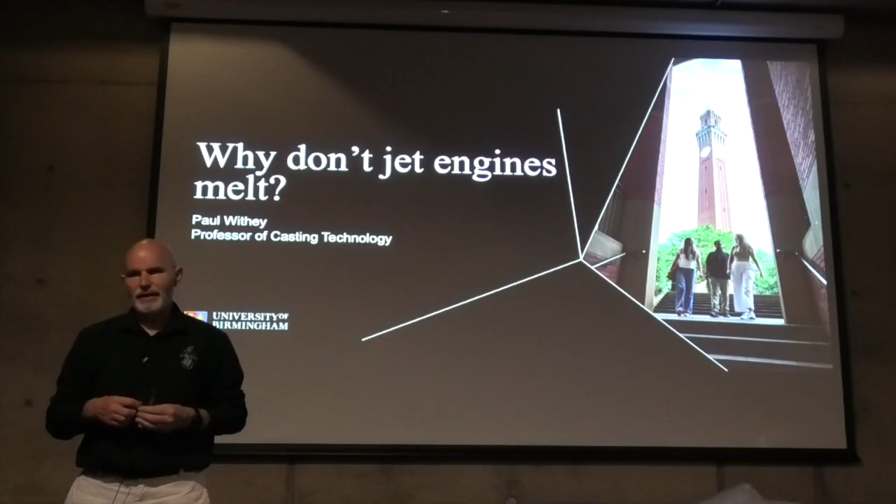So why don't jet engines melt? My career has been based, as Darren's kindly pointed out, for 3 decades around single crystal casting. Now, a lot of the talk was written around aircraft, commercial aircraft. But one thing to remember, and I'll try and touch on this as we go through, rotorcraft became viable. Leonardo da Vinci designed a theoretical rotorcraft, which was theoretical and man-powered and probably wouldn't have actually got off the drawing board, which is probably the best place to leave it. And whilst they came in with internal combustion engines, in terms of piston engines, they actually became viable with the advent of the gas turbine.

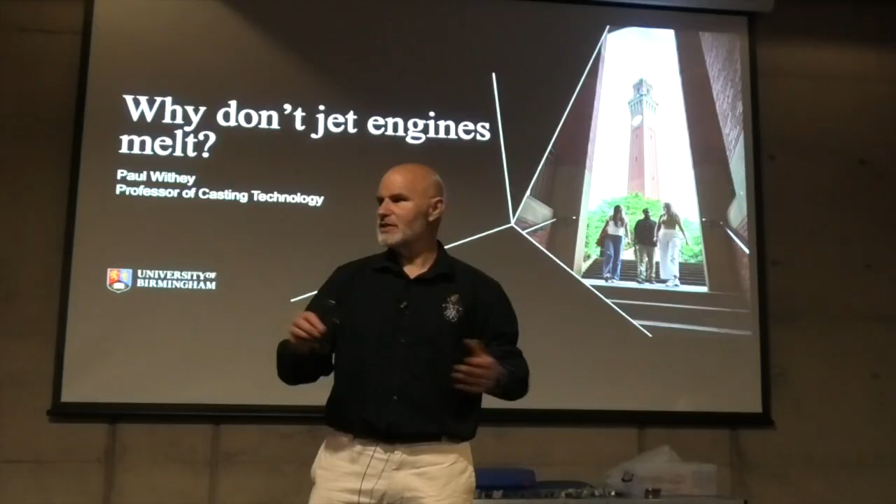The power-to-weight ratio of a gas turbine actually means that you can fly a helicopter in a way that means you can actually carry some load, which was always the way - that's a good achievement. And so everything I'm going to say today about why jet engines don't melt applies to helicopters, civil aircraft, military aircraft, anything that's gas turbine related. And to an extent, power generation, oil and gas pumping, anything that uses a gas turbine. So it's not that most of the examples are picked from civil aviation because that's all there is - it's because that's where I could nick most of the stuff from Rolls Royce. Sorry, that's on video.

But equally, it does actually give a good story to tell, especially for students who are trying to engage in STEM subjects. Now, the talk tonight is going to get a little bit technical, and I can only apologise. I'll try and keep the technical stuff as light and as high level, but if I start getting too technical, just throw something at me and we'll change the subject.

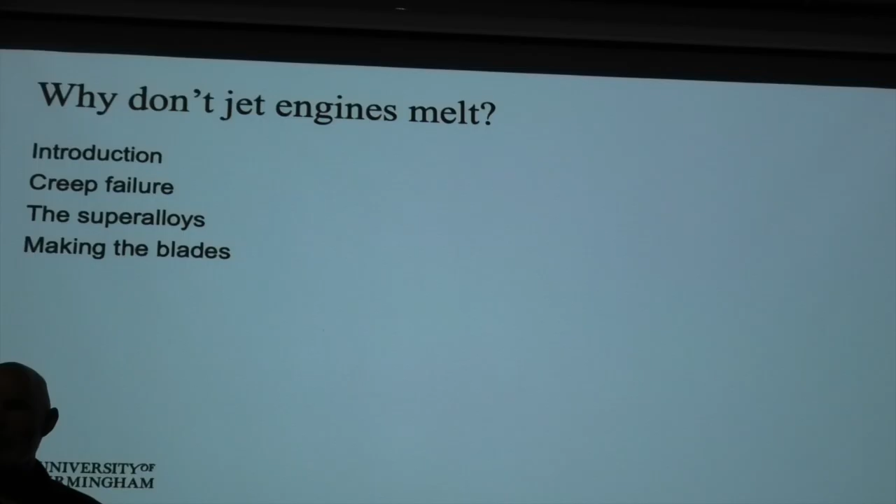So I'm going to try and cover a bit of an introduction, creep failure, the superalloys - the materials we make blades from - and making the blades, and we'll tidy it up with that. I'll be passing a few bits around, scattered there to remind me to pick them up and pass them on. Those of you playing Sudoku at the back may need to come forward a bit, otherwise your colleagues are going to be straining to pass them. I'm going to pass them to the front row, and hopefully by the end of the lecture most things will have got somewhere towards the back. But we'll see how it goes.

Aviation development - it is a long time ago. It's not that long ago that the Wright brothers made that first powered flight. So actually the development of aviation has been really, really quick, and I'm sure you're all aware of this.

It was only 1952, the world's first passenger aircraft, the Comet - that's a picture of the Comet that used to be outside. In 1959, world's first non-stop transatlantic jet service. And most people today assume popping across the Atlantic is kind of normal - I just go on the internet, buy a ticket, I'll be there tomorrow. Today's aircraft can carry over 10 times the number of passengers and up to 4 times the distance of that first jet airliner. So since 1952, we've come all that way.

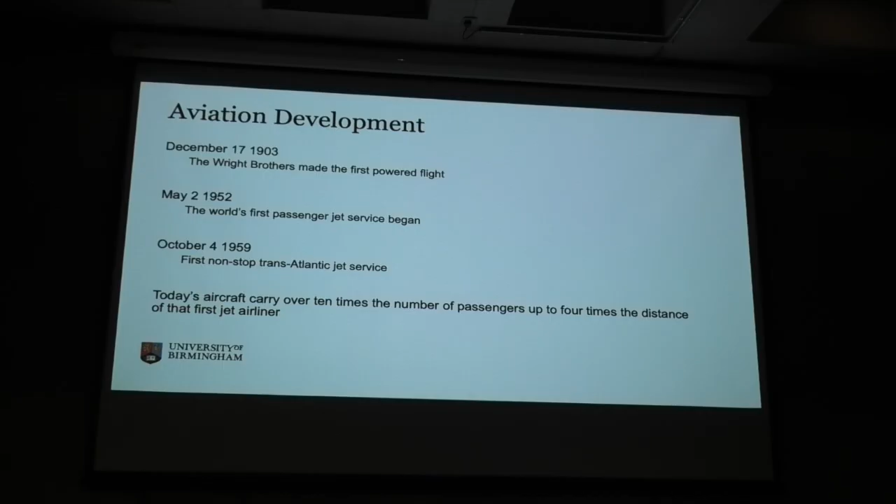But going back, the Wright vertical 4-cylinder engine was what the Wright brothers used for that first powered flight. It was designed by the Wright brothers because nobody else made even - if you think, cars weren't that much older than aircraft at this point, 1890s. So when they said we need a really good power-to-weight ratio motor, everyone said we haven't got one of those. So they had to design their own. It was handcrafted, hand-designed by their mechanic, and it's an aluminium casting. They actually got a foundry to do an aluminium casting - first use of aluminium in aero engines - to make the cylinder block. And they made the cylinder block, and it had 12 horsepower, and with the power of the propeller, about 90 pounds of thrust.

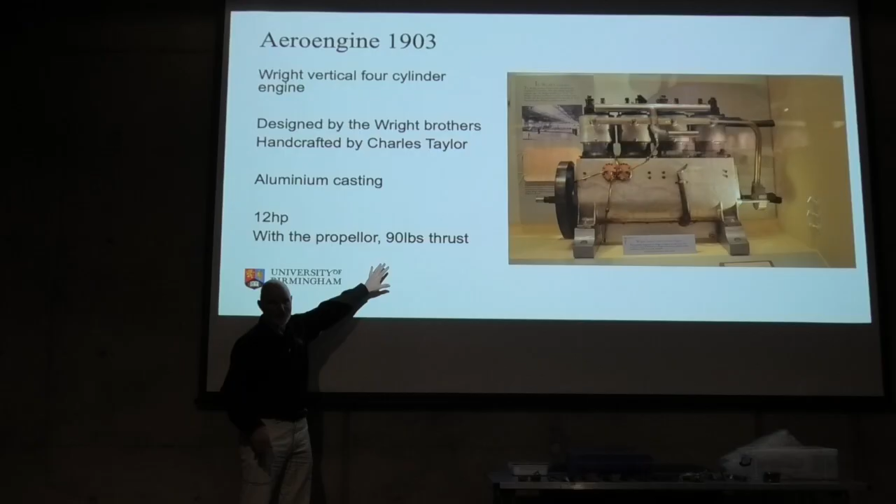We'll come back to these kind of numbers later. But 12 horsepower - if you had 3.5 of them, you could power a Reliant Robin. So I would say that they had what they needed for that first flight, but it wasn't very powerful. And what we've done since then is we've made it to the point where we can get people across the Atlantic, we can get them around the world, we can do long flights. So we've seen an incredible development since 1903.

Many areas: payload, range, reliability, safety - we don't expect to crash these days. Number of takeoffs, roughly equal number of landings. And it's been enabled by developments in many areas, but the casting of aerospace components that we'll be covering today - Professor of Casting kind of was in the clue - it's the casting of aerospace components, old processes modified for new materials. So that's where we're going to be going.

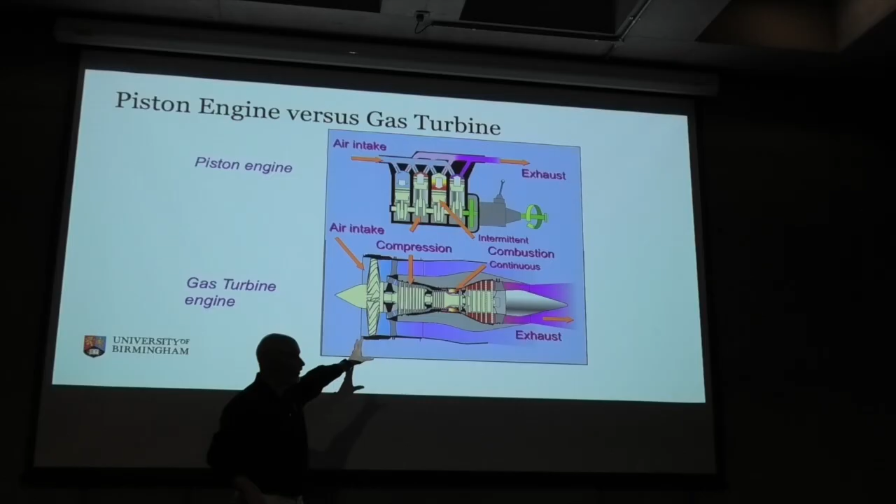But just that concept, the piston engine, that first piston engine, and the gas turbine. Why was the gas turbine? It was a steam turbine before, in the 1800s. Whittle really saw the benefit of that, Hans von Ohain the same. You get a piston engine - what you're trying to do there is generate power from burning fuel. There's no difference between the two different types. The issue is, in a piston engine, you're going to do everything in the same space. You're going to suck the fuel in with the air mixture, you're going to compress it, you're going to ignite it, get it to expand, then you're going to try and eject it and exhaust it, then you're going to go all around that cycle again.

For each of those bits of the cycle, the temperature you need is going to be slightly different. It kind of all comes out in the wash, and your internal combustion engine, your piston engine, runs at a pace that is kind of okay for what it's trying to do, everything all at once. What's more, we tend to rely on the fact that it doesn't get really, really hot when it's combusting, because it would start to need more cooling than we currently use for these types of engines.

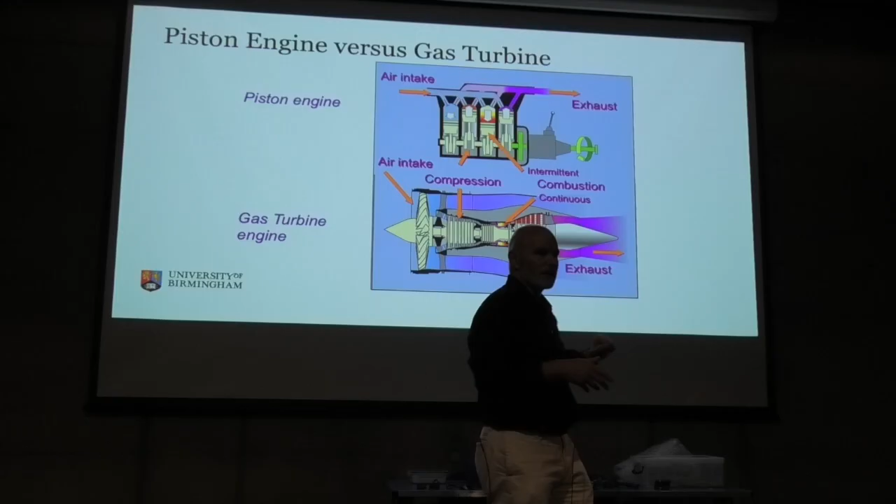The gas turbine is brilliant because instead of having the air in one place and getting it to do everything, we pass the air down the engine. It starts at the fan, gets a bit compressed, gets more through the compressor, pops out into the combustion chamber, we add fuel, we set fire to it, bit of a bang, chucks it out through the turbine, it starts to expand. We can do each of these stages in a line down the engine, and by doing it this way, each process can be optimised for what we're trying to achieve.

And because we work in aerospace, we're going to really stretch the limits of what we can do. If we can make it work really, really well, we will do, because power to weight ratio is absolutely key, and fuel efficiency is the total target. If we can do this for less fuel than we could a few years ago, we've got a winning product.

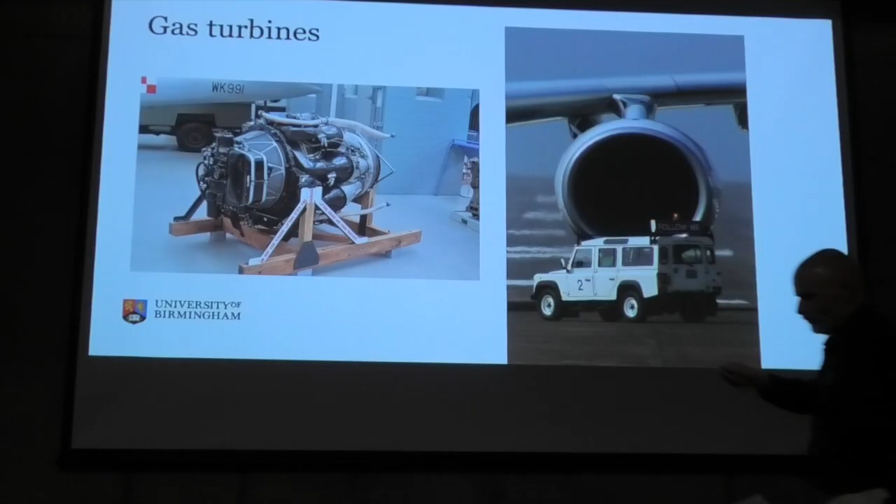Everybody's going to argue which gas turbine ran first. That's off a de Havilland Goblin engine, which actually first powered the Gloster Meteor, because the Rolls Royce engine was late - so it was frame number 5 that flew first with different engines. But it's not much different if you look at the Whittle engines - they all look the same, forged nimonic steel.

But look at what we've got today - massive things hanging under the wings, large fan. The early ones didn't have the fan. The technology has moved on so much to do what we're trying to do with that technology.

And what's that left for thrust? If you look at the early thrust engines - I talked about 90 pounds of thrust for the early Whittle, the Wright brothers engine - that wouldn't even just about make it off the axis today. So you see that kind of 1,000 pounds of thrust, using the old nomenclature, but it goes up like that. Now I stopped plotting this chart a couple of decades ago because it doesn't go up anymore - it kind of flat lines.

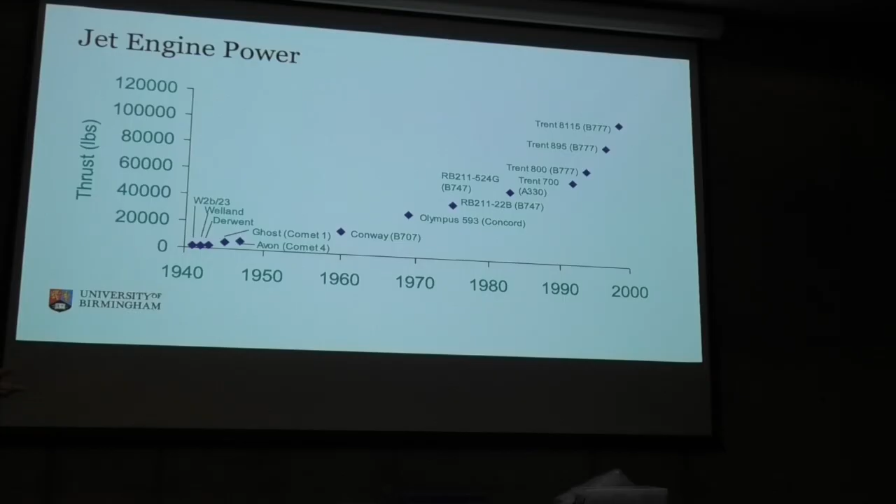What's happened is that as we've developed the technology to make these more efficient, we haven't needed bigger and bigger planes. We've maxed out with the plane size, and we've dropped it down from 4 engines to 2. So it's at the point now where you take one of those - the Trent 8115, Trent XWB 97K, those kind of engines floating around today - 2 of those would power the early jumbos. So you could strip off 4 engines, put 2 on, and that's more fuel efficient, which is roughly what we've done in terms of airframe design, which is why things like the jumbo jets and the Airbus A380s are dropping out of service - they've got 4 engines, they're less efficient.

We've closed the gap - the reliability of the engine has allowed us to close the gaps over the oceans that we used to have with 2 engines, because you're not allowed to fly a long distance on 1 engine. You had to prove you could get to your destination or your alternate if you had an engine failure. 4-engined aircraft, no real problem - fly on 3, you'd fly around the world on 3 if you had enough fuel. 2-engine aircraft lose an engine, you've got to make sure you've got the reliability left in 1 engine to get to your alternate airport or your prime. As we've made the engines more efficient, the amount of time we're allowed to fly on 1 engine has gone out - from 1 hour to 1.5 to 2 to 3, and it's gone out further.

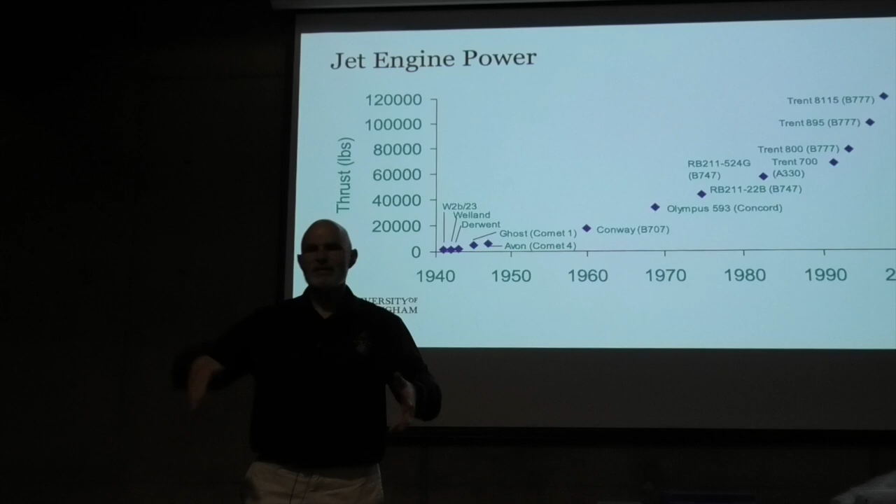So we're now allowed to fly long distance, which means that the holes that were over the oceans, which could only be closed by a 4-engined aircraft, have completely gone now. That's why the world is dominated by 2-engined aircraft. Also, not many people. You could re-engineer an Airbus A380 for 1,000 people if you so desired. Whether you'd want to be on a plane flying long distance with 999 other people in an aluminium can, I think it's a debate for the travelling public, but it's doable.

That's the kind of power we need because we're trying to lift everything off the ground. So what's happening inside the gas turbine while we're doing that? Well, we're actually compressing the gas, as I said, but we're going to compress the gas to about 60 atmospheres to really squeeze it down, so that when we add the fuel, it's got a lot of energy and it's going to just go out the back, it's going to expand really well. So that pressure chart at the top, you can see it goes to 60 atmospheres through the compressor stages, it goes into the combustion chamber, we add the fuel, it expands, and we blow it through the turbine.

Now, in old engines, we didn't have the big fan on the front. We used the fact that there was gas coming out at high speed out of the back, that gave us thrust. Today, 10% of the thrust is coming from that jet. The other 90% is the fact that we put a whacking great fan on the front, and we're actually generating most of the thrust from what is a 3-4 metre diameter propeller set, ducted propeller, and that's what we're doing.

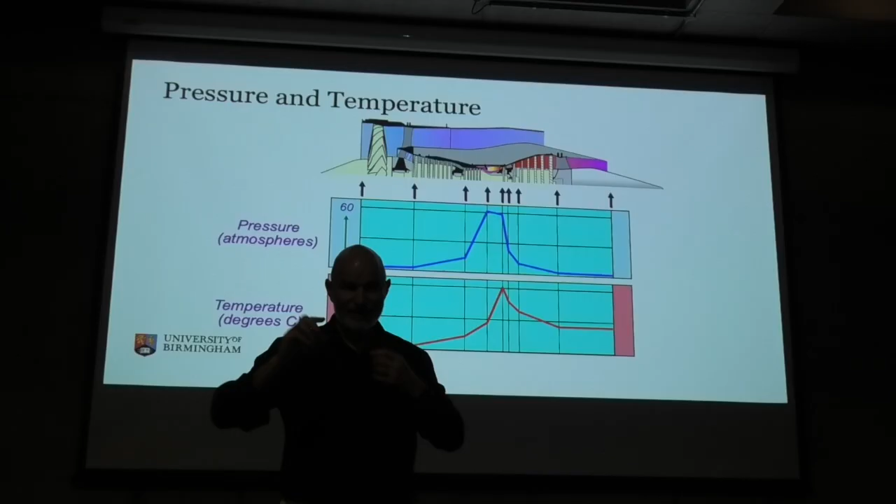But you can take that core, you can take the fan off the front, you can stick it through a gearbox and pop it up to a rotor set. Works exactly the same on a helicopter. Makes no difference to the technology on the inside. And in fact, it does make no difference. We, at Rolls Royce, make bits for helicopters, military aircraft, civil aircraft, power generation in the same production plant, in the same equipment. Makes no difference to us. It's a component. Helicopter blades, civil blades.

Yeah, so helicopter blades aren't that big, but because you do not need 100,000 pounds of thrust to lift a helicopter, you certainly don't need that big on the back of your helicopter. So we're going to squeeze it down. What that also means is that when we add the fuel and stick it out the back, the temperature goes up. Now, the compressor, adiabatic kind of compression, means that you're going to squeeze it down to a 60th of its previous size, so 60 atmospheres. That puts it up to about 650 degrees C.

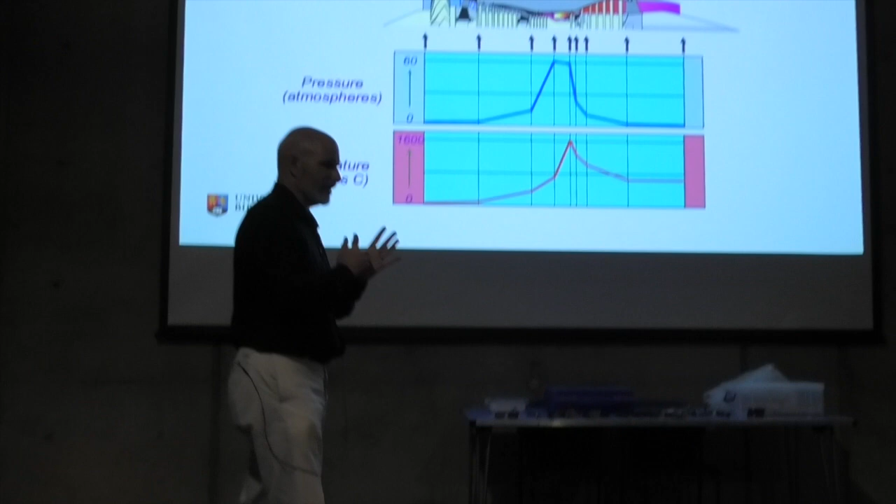Just purely compressing the gas, chemistry tells you that goes to about 650 degrees. So when it goes into the combustion chamber, it's a bit warm. Then we set fire to it, then it comes out the back. Now in a gas turbine, the efficiency of the gas turbine is entirely determined by what happens next. And the components that sit directly behind the combustion chamber determine the efficiency of the engine, the engine cycle itself.

The fan on the front determines the overall thrust and to an extent the noise, but all of the things like emissions, efficiency, everything else comes out of the turbine section, and primarily the high pressure turbine blade, which is the first rotating component behind the combustion chamber. And that's because that gets hit with the highest temperatures, so it has to be able to survive as best it can in a really, really aggressive environment.

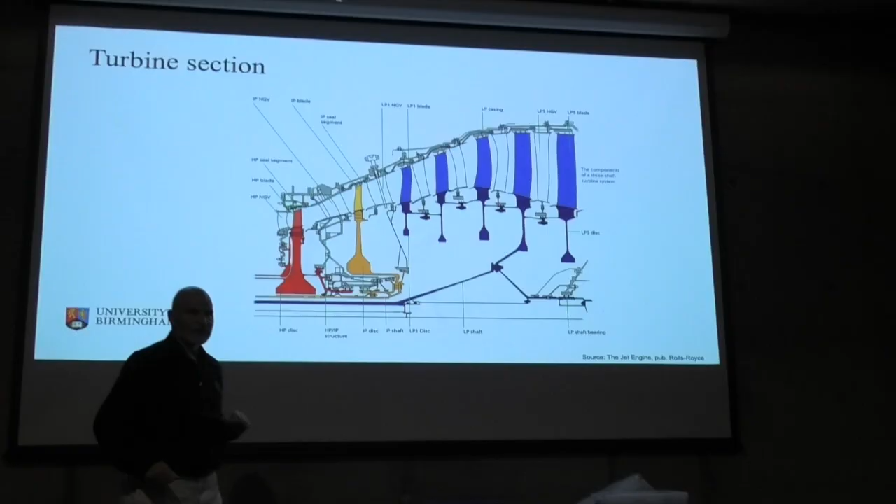So the temperature peaks out, and then as we expand the gas through the back end of the turbine, the turbine is just designed to take power out of that gas stream to power the compressor at the front. So all we're doing is taking power out of the back, whipping it up to the front to make it all turn, to suck more air in to make it go again. And the fact that we've put fuel in means we've got an energy balance which generates thrust at the same time. So we get the energy of the fuel, the chemical energy is turned to motion, thermal energy, and then onto mechanical energy. So, behind the combustion chamber, we've got in red the high pressure turbine blade. And that's the bit that determines your engine cycle.

That red component is followed by the yellow one, which is another turbine blade in a Rolls Royce engine, the intermediate pressure turbine blade. That powers a different compressor set. And then the low pressure is in blue.

Now it gets cool. So we're starting here at the hottest point. By the time we're down at this back end, we're probably exiting the gas turbine at about 700 degrees C. So that's the kind of temperature drop as we go through the engine.

So those are the components that are absolutely crucial. That one in red is the one I'm going to focus on today, because that's the one that drives everything.

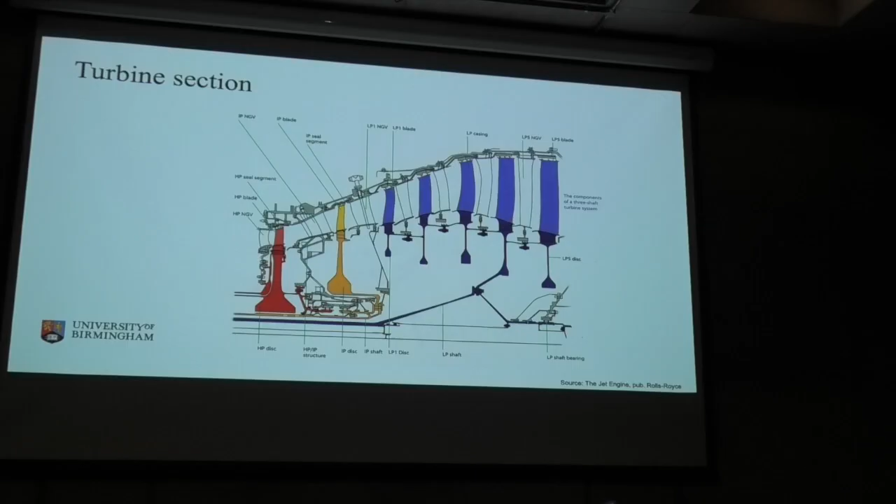And what we've done over the years, we've just driven that temperature up. We would like it to get to about 2,200 degrees C, maybe a bit more, and then burn the fuel as hot as we can to make it as efficient as we can as a kind of thermal engine.

2,200 degrees C will melt most things. There aren't many things around that you'd want to make a turbine out of that will survive that. So currently we're up at about just over 1,600 degrees C.

Now 1,600 degrees C is a bit of a challenge because a lot of that temperature is going to have to be either absorbed or removed from the system, or we're going to have to deal with a lot of heat. We're going to try and make sure that that engine doesn't melt. And 1,600, 1,608, 1,610, which is roughly where we are, is probably going to take a lot of technology to keep us there. I'll run through some of the numbers.

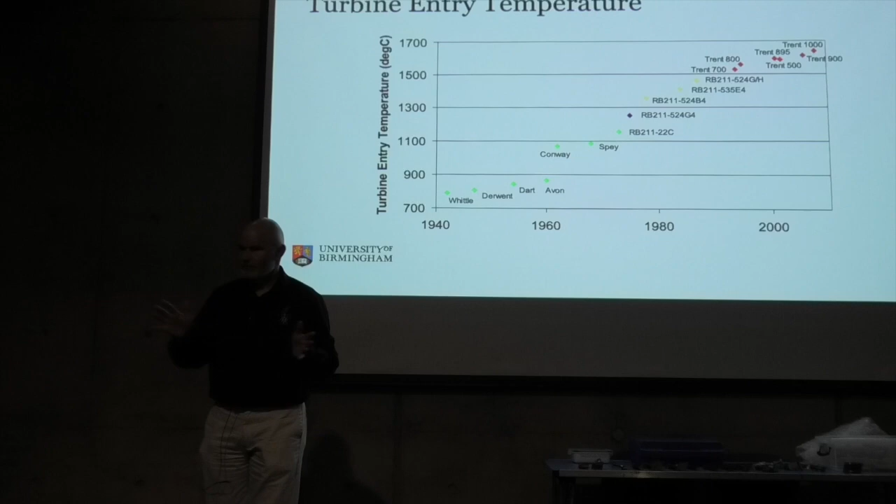The blade that's been passed around, the Whittle one, that took about 800 degrees C. Straight steel derivative, it got a bit warm, but it was fine. But also, we didn't expect it to last more than about 100 hours before we stripped the engine down and swapped it out. So we didn't ask it to do a lot of flying.

Because when you talk about the Trent turbine blade, and this is going to be the same, it doesn't really matter if it's Trent or any of the other manufacturers, you're going to do this to it. It's going to withstand a gas stream of 1,600 degrees C. That's more than 300 degrees C above the melting point of the metal. It's about 600, 550, 500 degrees C above the point that the metal goes a bit soft. So you've got a massive temperature gap between the point where you want to operate.

So next time you fly, don't sit there and think, oh, the blades are seeing 500 degrees C above where they should be. You'll rattle the poor person sitting next to you thinking they're not going to make it to wherever you're flying. And by the way, people keep asking me if I mind flying. I don't mind flying. I know what goes into some of this stuff, so I don't mind it, but you don't want to think about it too much.

We're going to rotate these blades at 13,000 RPM because we need to spin them in the gas stream. That's the equivalent of taking one of these blades - there you go, one of these blades - and if we grabbed it by the root and hung a lorry or a bus off it, it would be about the same weight. Now there's 60 odd of these in a set.

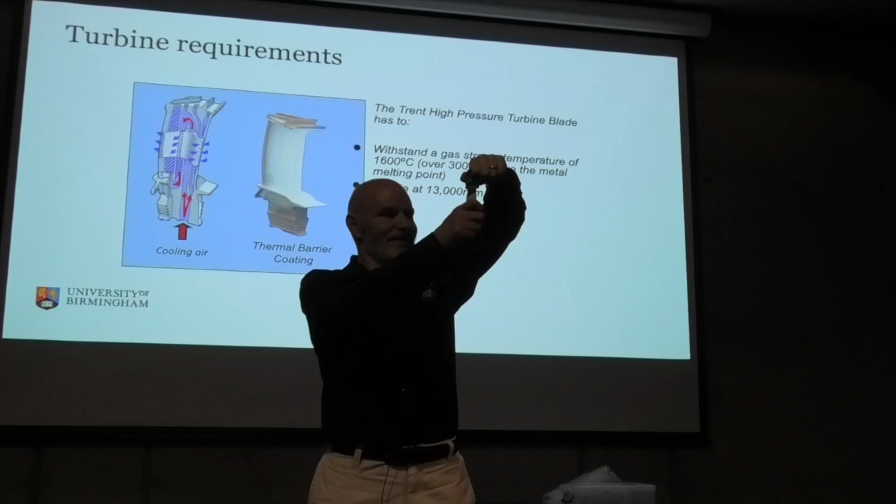And what we're going to say is we're going to hang it by that. And every blade has got a bus hanging off it statically. We're going to spin it that fast that this root block has got to take those kind of loads. It's about 18 to 20 tonnes. It'll keep us quiet for a bit.

Hang on, tell you what I'll do. Oh, yes, I will. I'll start at this side, you can pass them back in bits. Right, so, that's a few thousand pounds worth of spares.

So anyway, rotating at 13,000, so we're putting a huge load on these. We're not expecting them just to kind of spin naturally. The heat transfer rate, to keep it down at 1050, 1100 degrees C, the heat transfer rate that we're going to have to take out of that system, for just one blade, is about the same as taking all of the radiators in a 3-bed semi and cramming them into something the size that I'm just passing around.

So it's that kind of heat transfer rate that you're expecting it to happen. So we're having to dump the heat somewhere, but we also expect it to power the compressor, the high pressure compressor, and pull more gas in and compress it. 900 horsepower, each of those blades, 60 odd in a set, more than 60 in a set, each one has to generate more than 900 horsepower.

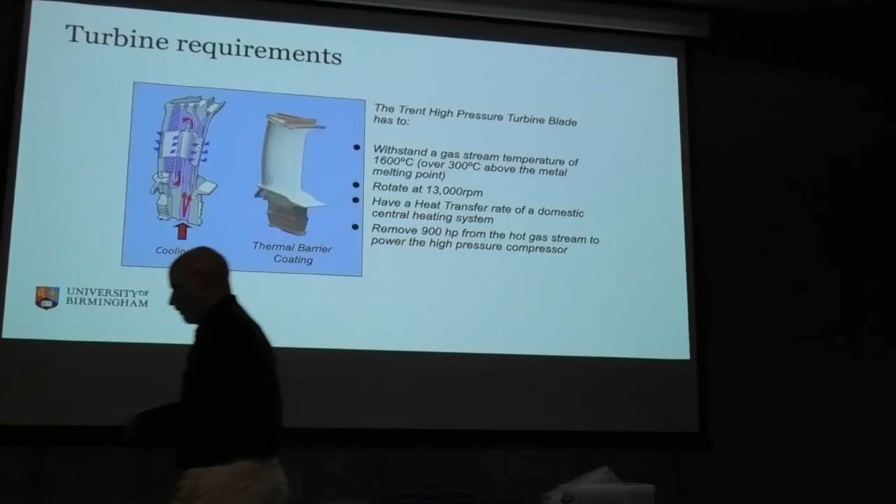So when we spin up one of these engines for takeoff, it's the same power as 3 Grand Prix at once, in terms of an internal combustion engine, just enjoying the sport of it. So it's a lot of power in a gas turbine. 900 horsepower is about the same as a Formula 1 car, and actually they've kept pace—Formula 1 car versus turbine blade power has kept pace over the last couple of decades.

We use cooling air. You'll see there's holes in it. We blow cooling air in and pass it around the blade to allow us to deal with that heat. You can see the shapes of the cooling passage, and we're going to blow it in. Now, the problem is that if you're going to blow air in, it's got to go out through the film cooling holes. We can't have hot gas coming back in through the holes, we've got to blow out. The only place we can find high pressure air that's higher than the gas stream it's sitting in is from the back of the high pressure compressor.

So as I said earlier, it's about 650 degrees C by the time it gets there. We bleed some of this off, pass it through the turbine blade. So...

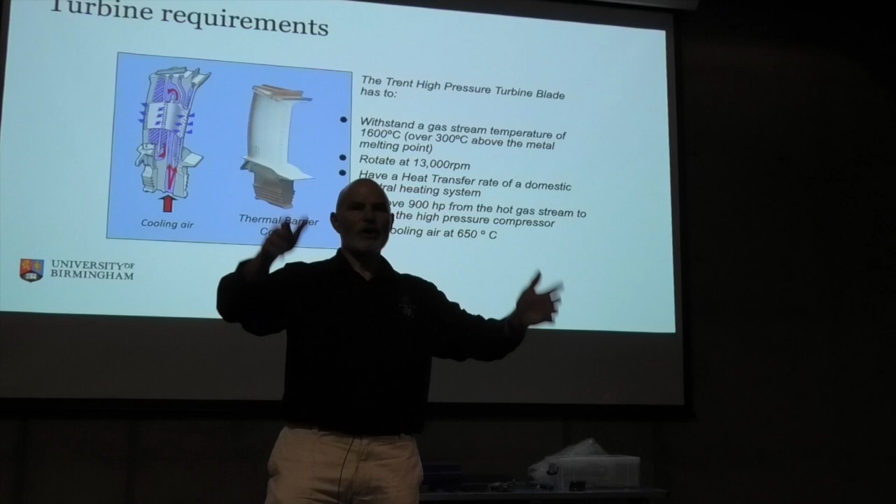I've had a career of this. You walk into the design teams and they say, oh yes, we've got cooling air. Yeah, cooling air. What temperature is your cooling air? It's 650 degrees C. Don't use it in your fridge. You know, the concept of cooling—just because we're operating at 1600 degrees C, 650 is cooling. But it's not, you have to get your mind around the fact that it'll still melt stuff.

So we've got this cooling air, 650 degrees C, we're passing it through to try and keep ourselves at about 1050 degrees C in a gas stream of 1600.

So that's the thermodynamics, that's fine, but then we've got customers. And the fare-paying public really appreciate the high tech that we put into these engines and the costs involved in making it, so they look for the cheapest flight they can. So the airlines want the cheapest option that they can get. Or, put it another way...

Can you do 10 million flying miles between services? 10 million flying miles is quite a distance. An aircraft, once it's launched, we won't expect to see it for another few years, 5, 6 years, before it comes in for its first service. Oh, and by the way, just like everybody looks after their car and polishes it, airlines...

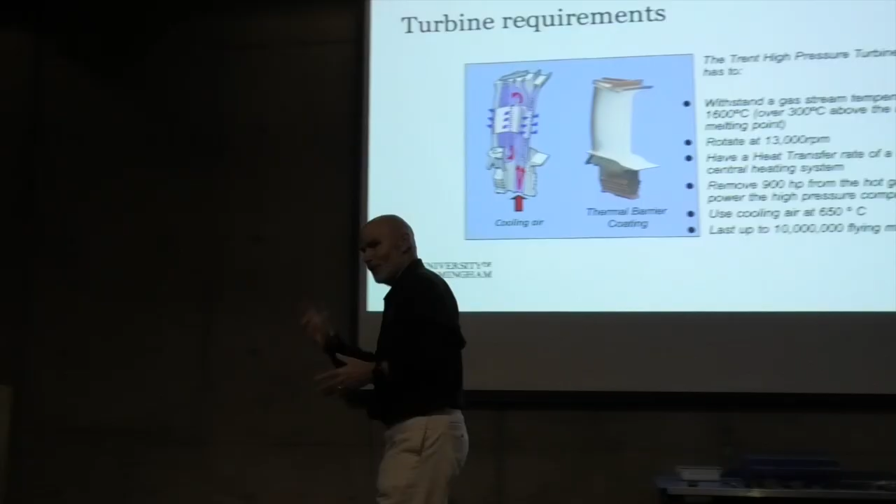They leave the aircraft outside on the stand, they let it get rained on, it gets hit by lightning once a year, it gets covered in all sorts of nasty chemicals when they're de-icing it. They really don't look after these things. And by the way, it ingests all sorts of stuff down the runway. So we are not looking after these things, but we need 10 million flying miles, guys. So we've got to make it robust and high-tech.

Customers—it'd be a lot easier if we just focused on the technology. So what we've got, that jump, you see, 1960s-ish, the Conway engine came in, we started using cooling air. Actually, the Germans, in 1943, used cooling air in the Junkers Jumo 004. They couldn't get the alloying elements for the steel, so they used cooling air. They used forged tube, blew cooling air through it, and the engine worked a treat. But because they didn't win the war, and the engine got canned, we went back to using forged steel-type blades.

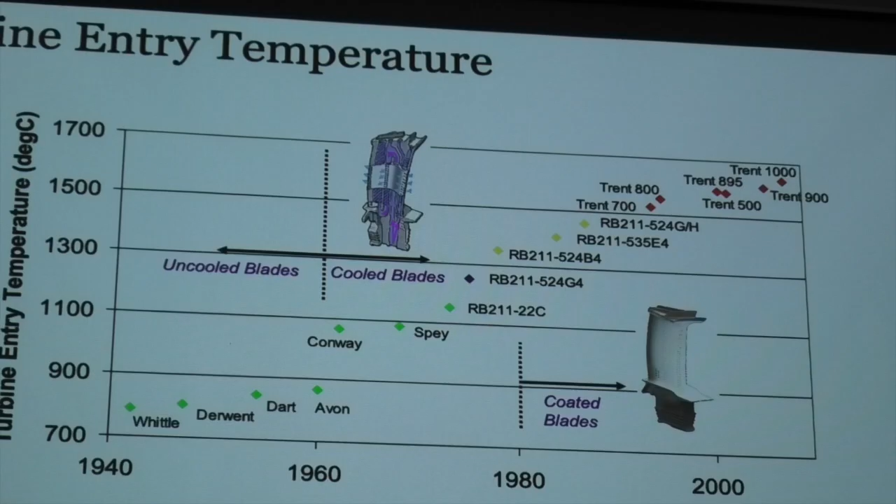And didn't actually start using cooling air again until the 1960s. But then we brought it back in again, the Conway, and so we started using cooling air, and we saw that jump in temperature. Then we started coating the blades, and you see the white coating on that blade, that's ceramic coating—I'll touch on that right at the end. That ceramic coating is like a tea cosy, and it just gives another 200 degrees. And that's why we've jumped up again. I'll come back to the couple of spots in a minute.

Right, creep failure. I'm now going to go into what the problem is. We're going to take these blades and hang 27 tons off them at temperatures up to 1600 degrees C, though it's probably more like 1,050 degrees C in practice. That's still quite warm for an alloy that melts at 1600 degrees C. We're going to hang these blades at those temperatures for a long time, and because of that we start to see something called creep failure.

Some of you will probably know it, some of you won't, so I'll run through it. Creep is the deformation of a material under constant load over a prolonged period of time. Some materials creep at room temperature, others require a bit of a temperature boost to do it.

Lead creeps, which is one reason why cathedrals change their roofs every couple of centuries - the lead roofing starts to move its way down and fattens up at the bottom. So we start to see creep failures in that. You see creep failures in all sorts of materials at different temperatures.

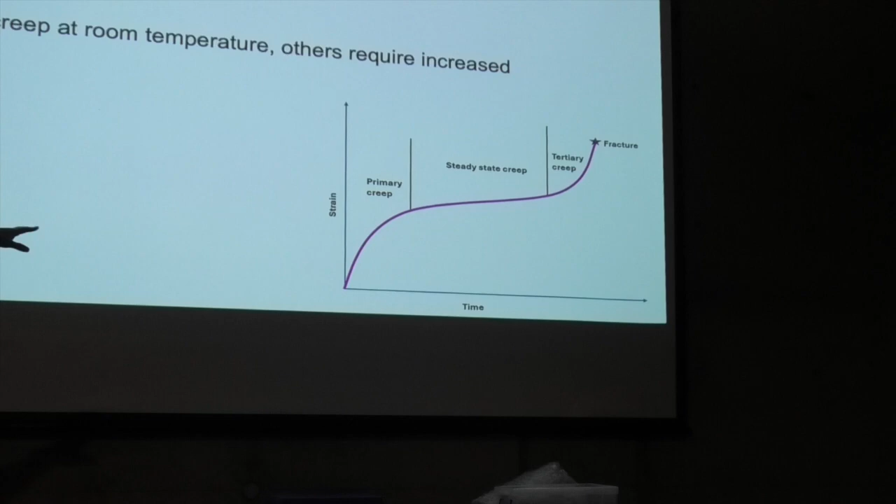That's a standard engineering graph that shows it takes a while to get going, then it's steady state creep, and we try to make sure it's steady state creep for a long time.

Then you get your final failure. Now, creep in metals happens for a number of different reasons. Diffusion creep: you get little imperfections in the crystal, you hang it up, and because of the stress direction, these imperfections can move around. It requires high temperatures, but they move around and hit the grain boundaries, and then the grain boundaries go over.

Grain boundary sliding is where the grains - if you look at a standard metal and polish it back, it looks like a sugar cube, with lots of different grains in different orientations. If you take a sugar cube and try to break it, you're not breaking the individual grains much, you're actually breaking the boundaries between the grains, because that's the weak spot.

Those grain boundaries slide in metals, and it's that sliding that means you get creep, so we get elongation with time. When we start off with a blade this long, it grows with that stress in that direction, and the longer we leave it, the more it grows, until the point where we say you can only have so much growth, and then we scrap it.

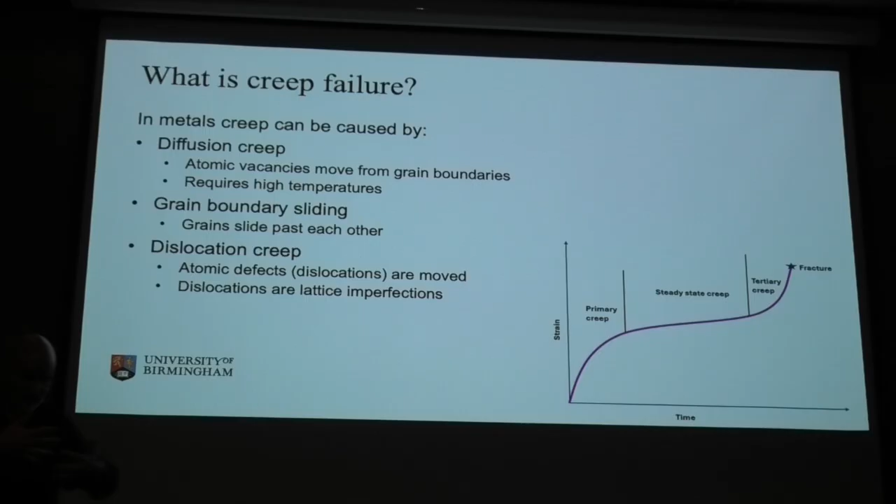Dislocation creep involves atomic defects - dislocations in the crystal, imperfections in planes of crystal atoms. You can see these on some high-power microscopes, and they move with time. Lots of atoms moving around is why we're trying to stop this happening. It's all creep, but really on the atomic scale.

So what we can do to stop it - this is the metallurgist's go-to list of things to do. We can avoid plastic deformation by cold working. Many of you have taken a piece of copper pipe, bent it one way, then found you can't bend it back again. What happens is a lot of these dislocations move, they tangle up, and toughen the material, making it harder.

That also means it's much tougher to creep. If you put in loads of dislocations, you tangle them up, they don't move very well, and they all stop moving - that slows creep down. That's one way of stopping creep. Another is refining the grain size: larger grains mean less creep, with fewer grain boundaries.

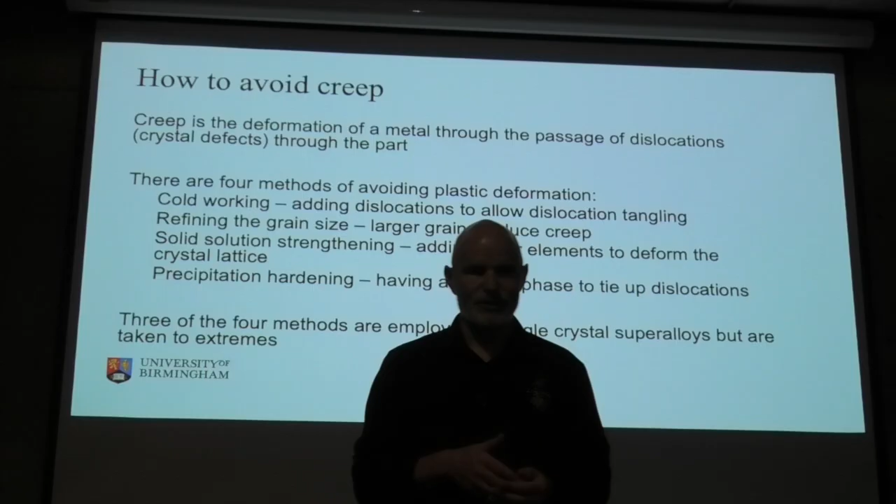Fairly simple. Solid solution strengthening is a favourite one - adding another element to deform the crystal lattice. You find an element that you can stuff into your alloy that won't come out as a precipitate, but goes into solution and deforms the crystal, so dislocations - these atomic imperfections - meet it and get stuck. And there's precipitation hardening, where we try to get different phases to pop out when we heat treat the metal at the right size, to tie up these dislocations as they move around.

That's the kind of metallurgist handbook for creep. There's a number of textbooks written about that, and that's the way we stop creep.

Now we employ 3 of the 4 methods, I'll come back to that in a minute. If we're going to look at that, what alloys would you pick for these kind of temperatures? Nickel chrome solid solution alloys have inadequate strength. So some of the historic alloys people have picked haven't got the right strength, they just wouldn't be strong enough for gas turbine use. Good for creep, but not at these kind of loads. So blocking of dislocations and grain movements is required.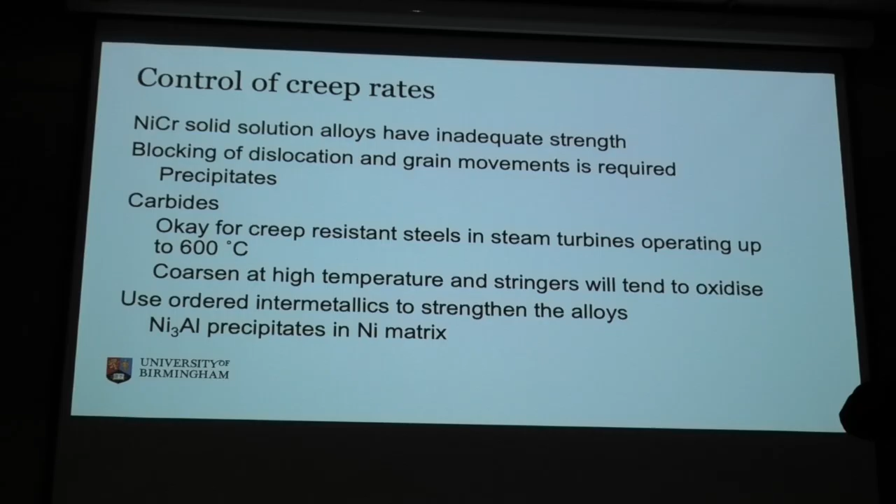So we could use carbides, we've used those for centuries. It's why in steels, you put a bit of carbon in there, you get carbides, and you get steel much stronger than iron. We learnt that through the Industrial Revolution. Really, really good. Unfortunately, you go over about 600 degrees C and those carbides start to coarsen, at which point you lose strength. So we're kind of limited, we're a few hundred degrees C above where that actually works for us. So we actually use a nickel aluminium alloy and we get little precipitates that we can control at the right temperature.

I'll show you some pictures of something in it. But just to go on to that, the superalloys, these are the blade materials. These materials that I'm going to pass around are made out of what are called superalloys. I don't know who gave them the name, they don't go around wearing capes. Anyway, they're called superalloys because they retain their strength to about 80% of their melting point.

And actually it's crucial that they do, we're going to really squeeze the last little bit of juice out of these materials. The fact that they can go to about 80% of their melting point and still be a useful material, somebody went and coined the phrase superalloys. It may have been Chesterton in the States, I'm not sure. Whoever it did, they'd been reading too many Marvel comics.

So there are 3 kind of classes of them: nickel-based, nickel-iron based, and cobalt-based. We tend to be focused only on the nickel-based. Nickel-iron base haven't quite got the strength. Nickel-cobalt, a bit too heavy, equally strength-wise. But then we're going to stick in other things as well, it's not just nickel. I think I've spent too long being a metallurgist, we will throw the kitchen sink at these things if we think it will work. It's not that we're going to add 1 element, why add 1 when you can find 10 in the periodic table?

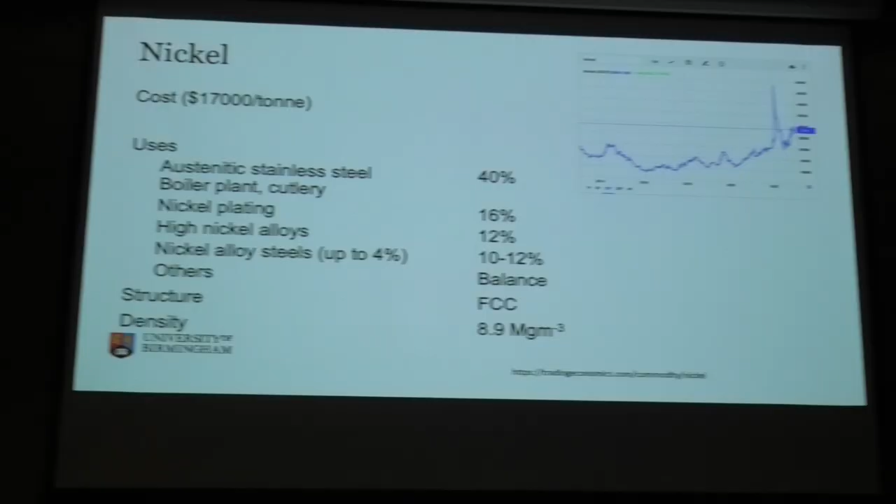So we're going to see what some of these elements do for us. But nickel itself, the current spot price isn't far off $17,000 a tonne. Bulk of the use is austenitic stainless steel, boiler plant and cutlery. So nickel's really got a place in the world doing stuff anyway, even before we got involved. Nickel plating, 16%, so jewellery, plating, nickel coatings. High nickel alloys, 12%, nickel alloy steels, another 12%, and then bits and pieces. So it had a career before we took it on, now it's being used heavily in the aerospace industry.

It's a cubic alloy, I'll come on to what that means. The issue with nickel alloys, and this is where it gets horrible, is density: 8.9 megagrams per cubic metre, or 9 tonnes per cubic metre. So it would be 9 tonnes of weight, not an ideal aerospace alloy. When you talk about aerospace alloys, people go titanium, aluminium, great, low density, high strength. Nickel, not so much.

Titaniums won't work, by the way. They go through a phase change, going from the alpha to beta phase at about 880 degrees C. That means you can't use them much above 400 or 500 degrees C without having a phase change in service, which weakens the whole system and the whole thing goes to pieces. Which is why we don't use titaniums, it just doesn't work. Nickels don't have that phase change, they don't change structure halfway through your process.

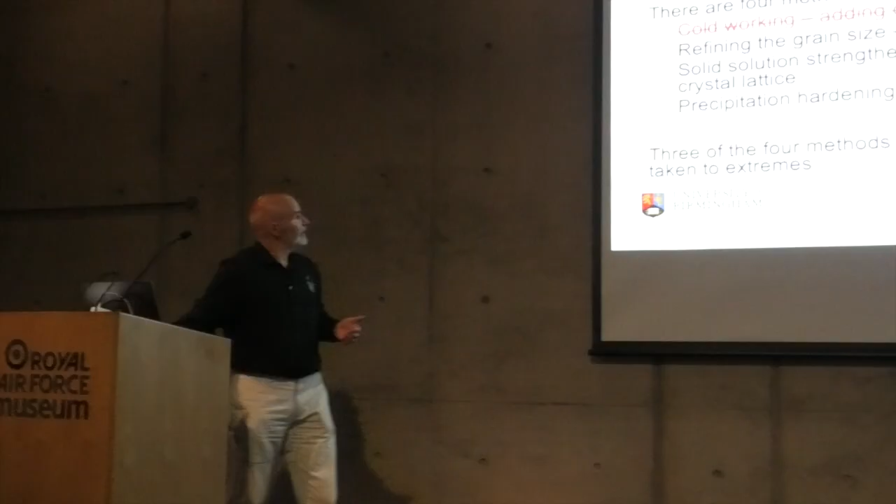Right then, so back to that slide. 4 methods of avoiding plastic deformation: cold working, which I said was great, you know, bend things, tighten the dislocations, works a treat. Problem is, you get out of that fix by heating it up. So if you've ever bent your copper pipe and found you really need to bend it back, if you heat it up you can then bend it back again, because the heat kind of fixes the dislocation tangles and sorts out the atoms, they've all diffused and sorted out the crystal structure, so you can bend it back again.

The problem is if your service temperature means that even if we took a turbine blade and beat it up before we put it in, by the time it had done its first engine run, it would have sorted itself out and we'd have fixed the problem. And what you don't want to see is after every flight, a maintenance fitter going in with a hammer and bashing the engines, because that's not a good look if you're trying to fly. So we don't use cold working.

The other three, however, we're going to have a pretty good go at. We'll start at the bottom: precipitation hardening, having a second phase to pin dislocations. It's been used for years - steels, aluminium alloys, we've done it for centuries. Nickel, we're going to really push the boat out.

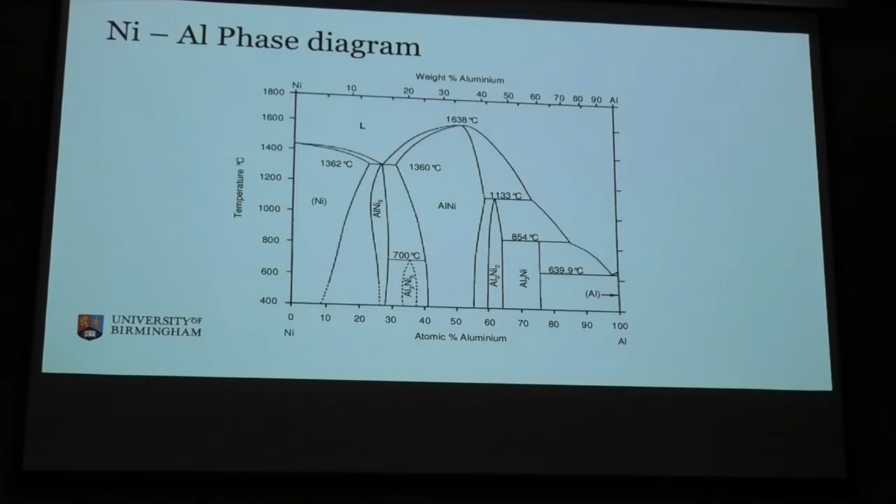Sorry, phase diagram, I realise this isn't everybody's cup of tea. But effectively, we're going to add aluminium in there, and it goes into solution initially. So it basically disappears into the nickel matrix, and it's fine up to about 10-20%. You wouldn't know it was there. It lightens the alloy, and it just kind of sits there.

Above that, it actually forms nickel-3 aluminium, or aluminium nickel-3 as it's written there. But that's actually a different phase, and it's an ordered structure. The atoms suddenly, instead of just sitting anywhere in the crystal lattice, get really fussy about where they're sitting, and they won't sit next to each other. So they pick their spots in the crystal and get really awkward. That's an ordered phase, versus the kind of sit-anywhere phase.

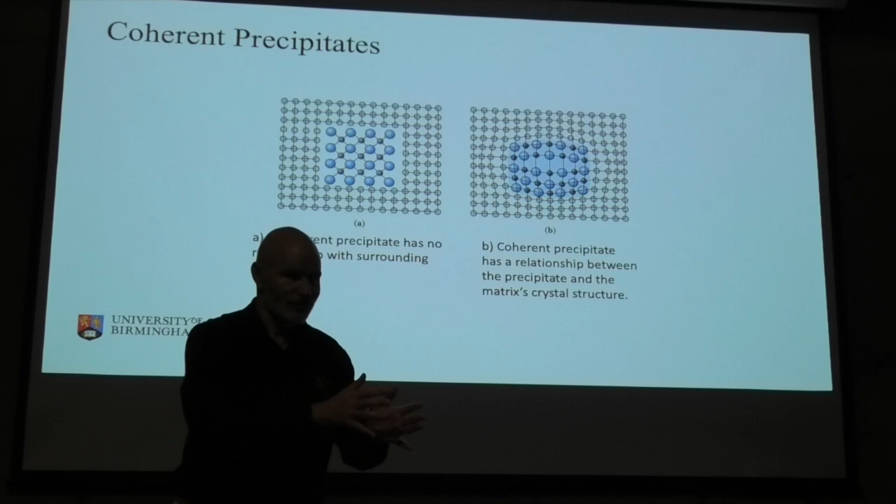What it does mean is that they come out as a precipitate, but it's called coherent - it's actually exactly the same crystal structure, just ordered rather than disordered. It's got a slight mismatch, maybe in the spacing of the atoms, but only a few percent. So actually it sits there in the crystal lattice, and the atoms themselves think they're in the same crystal. There isn't a boundary, so we can't get sliding because there isn't a boundary that they've noticed. They can wander to the next atom and it just carries on. So that's really nice - we get these ordered precipitates.

So that's the technical stuff. What happens is we've got face centred cubic, which is a particular cubic crystal structure, really good for strength. But then they get fussy - the nickels sit on the face centres, the aluminiums sit on the corners, because they don't like sitting next to each other. So they all disperse to their corners. As soon as you get to the right concentration of aluminium in there, it splits up, sits in its different places, and gives us this coherent precipitate.

Now we've got all the metallurgy going, all that's exciting - what can we do with this? So anyway, we've got the aluminium in there. We don't like a lot of aluminium - it melts at too low a temperature. So we're going to get things that pretend they're aluminium: tantalum and titanium, really good. Cobalt substitutes for nickel a little bit, but tantalum, titanium and aluminium all pretend they're aluminium. So they sit on the corners, nickel in the face centres, and we've got this coherent phase.

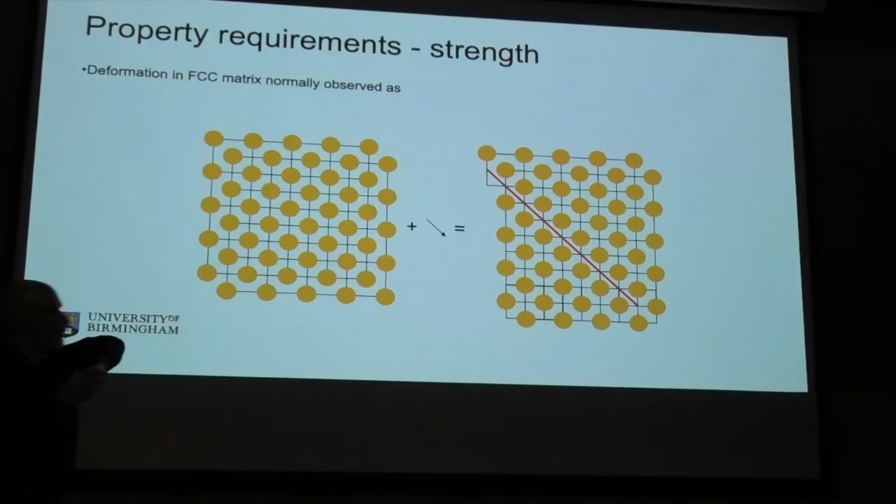The reason it matters: if we took a crystal and loaded it up, and just moved a dislocation through over time, we jog down one place, just like that red line shows. No problem - we've loaded it up, added temperature, and the atoms have one by one gone pop, pop, pop, pop, unbonded from its neighbour, dropped down, bonded to the one next door, and the dislocations move through.

You do that with one where they don't like being next to each other, and you end up with, oh, if I pop through, now I'm sitting next to somebody I don't want to sit next to, and I don't like that. So you've unzipped the crystal, zipped it back together again, and they're going, I didn't want to be here. So actually the fix is, let's send through a second dislocation, and move them all along again. So you have to do two dislocations to get one happy crystal.

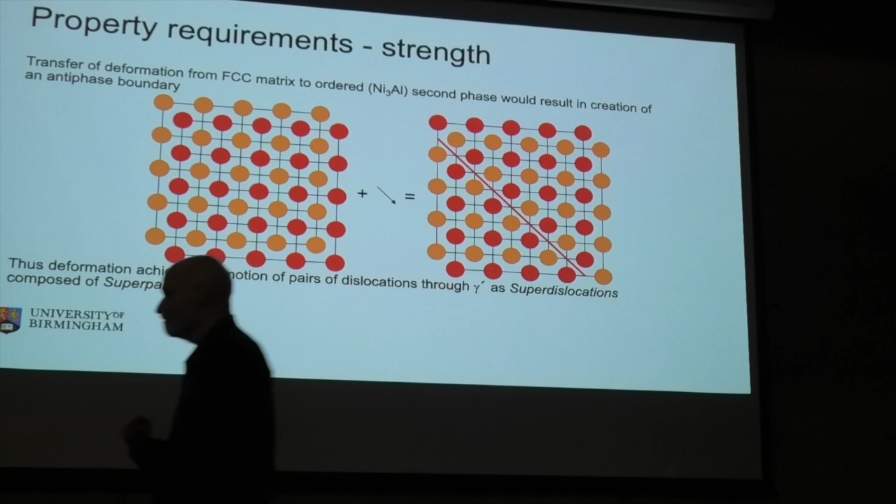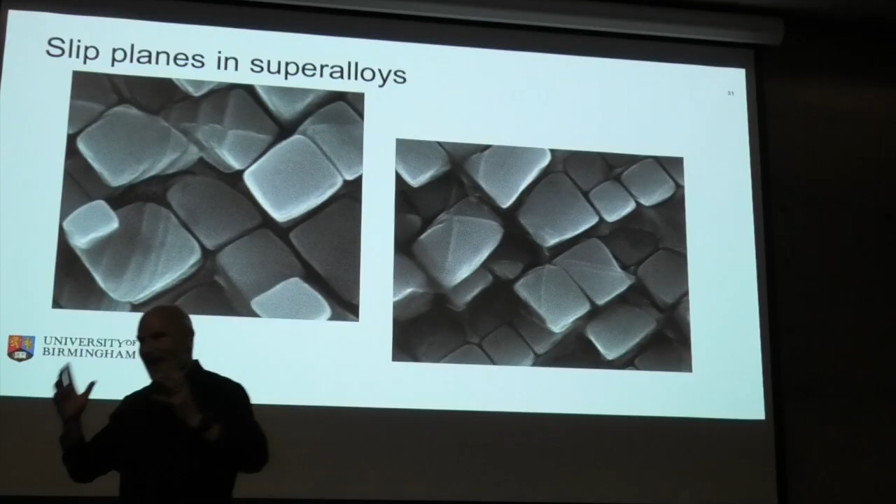So we've put a coherent precipitate into there, and as you can see, in most alloys, for any of you that have looked at aluminium alloys or whatever, you get 5% of your material as precipitate, and you've tied up the dislocations and you're really happy. In nickel, we go for 70%. We don't hang around at 5, we just go to ridiculous limits. All of these alloys are generating the extreme kind of alloy chemistry that we can. 70% of it is precipitate. But it's really, really good.

What happens is that those partials move along particular crystal planes, these dislocations, and so as you stretch them, they go around in pairs.

The thing is, we get a strength increase at higher temperatures. That's good, because it means we're not dropping off. Most alloys, when you see them, go along and then drop off. Nickel alloys go along and get stronger. That's quite nice. But why?

What happens is, as you go up in temperature, alloys get weaker because you've got these planes that dislocations can move through, these atomic distortions. As you get hotter, they can go on different planes in the crystal, and so they can travel in different directions.

What happens if you've got two that have to travel together? The best analogy I've got is you've got a train on a track, and they're going around together. All of a sudden, a siding goes off, and one of them decides it's going that way. One goes off on the main line, and one goes off down the siding, at which point they're on their own again, sitting next to mates they don't want, and they all stop moving again.

So we get strength as we open up more options of moving in different directions, because they all decide they can't be bothered to move off without their friends. So we have to put even more energy in, hence that little jump.

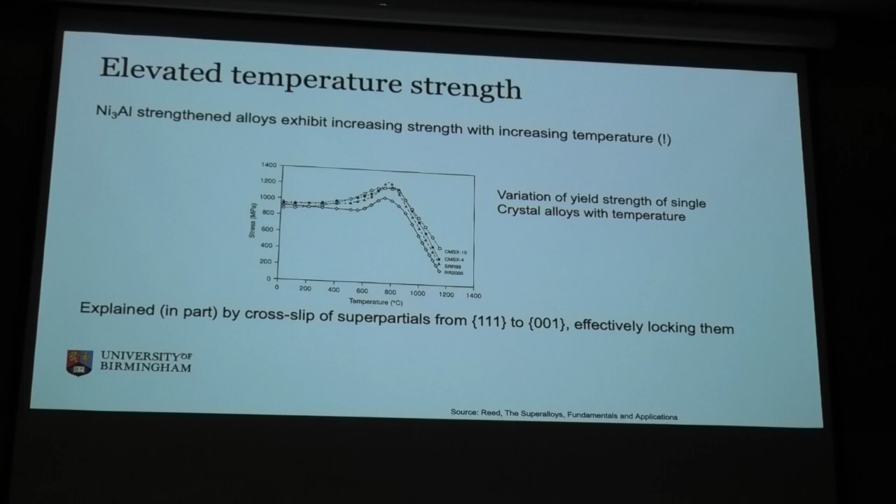So we really have engineered these materials beyond belief. You can see a lot of words on that side saying why it works. Those are actually TEM images from Roger Reed's book showing those two dislocations travelling around together, and we can image them, we can look at them, we can see them moving.

And especially if we go for high volume fractions of this precipitate, we mean that 70% of the material is precipitate. There's a bit of a philosophical debate about how much you have to have in there before it stops being the precipitate and becomes the main phase. But we still claim at 30% that the main phase is the main phase. We get this precipitate in there, and we just tie up this dislocation.

So as we try and stretch these materials, we get this lovely strength increase. We then add other elements to deform the crystal lattice to make sure that what's left of the system we can work with. And because we've still got 30% of this disordered phase, the other phase, not the precipitate...

...we shove in things like rhenium and tungsten. Great elements, they don't diffuse very fast, get in the way, they just sit there like big blocking elements and tie up dislocations in the other phase. So if the dislocations try to get round the precipitate, they meet rhenium and tungsten. If they try and go through the precipitate, they've got to find a friend.

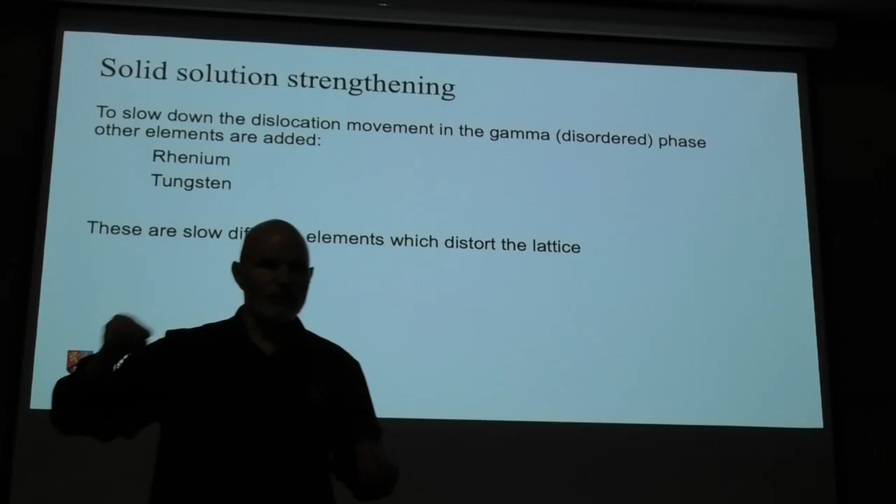So in terms of stretching these materials, we've tried to find ways of really tying up creep, so the growth we get of these metals has been really slowed down. We can hang them there with a weight on for a lot longer because we've really over-engineered the alloys.

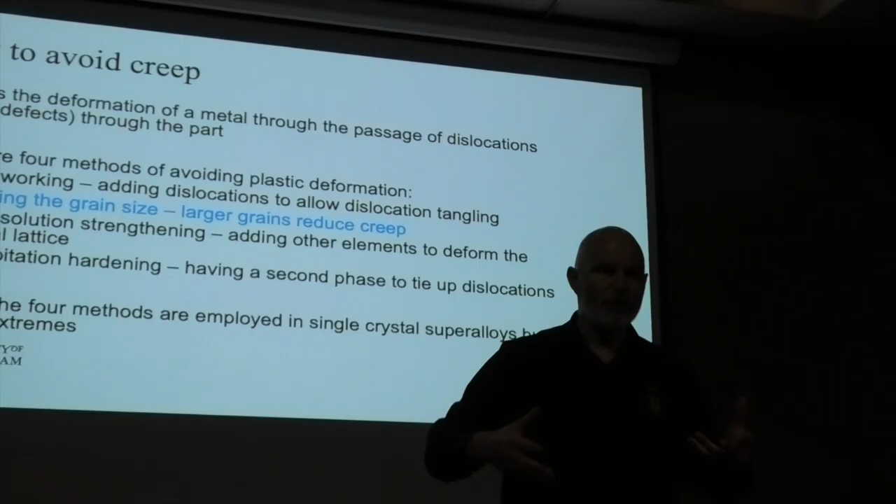And these slowly diffusing elements are what we use to distort the lattice. The other approach is refining the grain size. Bigger grains make creep harder; smaller grains make your strength better, bigger grains worse, so it depends on whether you want strength or creep. We want creep, so we want bigger grains. So what's the best way of getting bigger grains?

Well, we get really cocky and think, we could take these parts and make them directionally solidified. And that's a blade. I put the lights on at the back.

If you look at it, it's etched up. You'll see that there's some fairly fine grains in there if you look closely. I've chemically etched the surface so you can see the grains. This is a directionally solidified part we developed in the 1970s-80s, where we decided we'd have really long grains in the direction of maximum stress, so the grain boundaries weren't being pulled apart. Instead of your sugar cube being pulled apart, we'd have long thin grains, and you pull along the length of them. That made it much stronger. So we went for directional solidification.

I'll let you squint at that. We'll stick them on the table at the end in better lighting, and you can probably have a better view of it. So then what we said was, well, if we get rid of all of the grain boundaries...

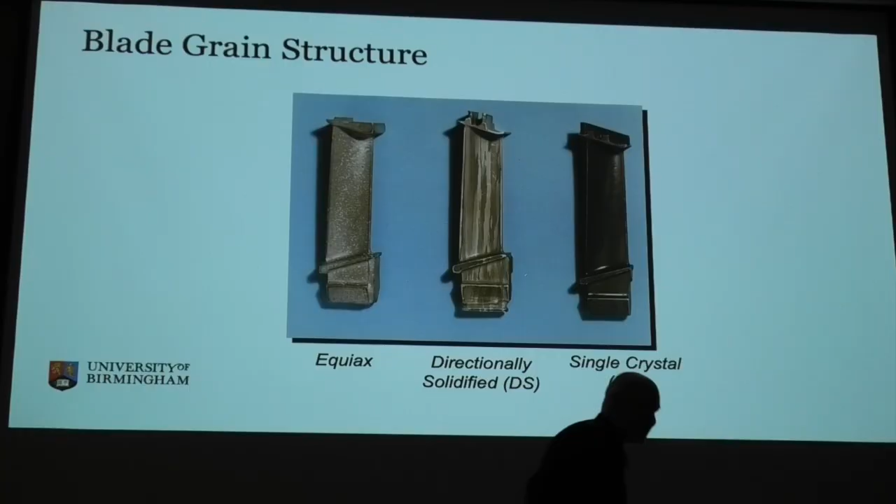It's a single crystal. There's no grain boundaries to creep. What a fantastic idea. So you've got single crystal. This is all one grain, this component. 6 times 10 to the 24 atoms, for those of you that want to count them. You kind of have these, how many atoms is it, the number of stones on the beach, or coins? It's about the same number of stars in the universe, so that didn't help me either. I've still not got an idea. I still can't picture 6 times 10 to the 24 atoms.

I've etched this one up, and it is absolutely the most boring blade to look at etched, because etching reveals the grain boundaries. There are none. So, good luck with that. I'm going to pass this one at this end, and you can find out there's absolutely nothing to look at there.

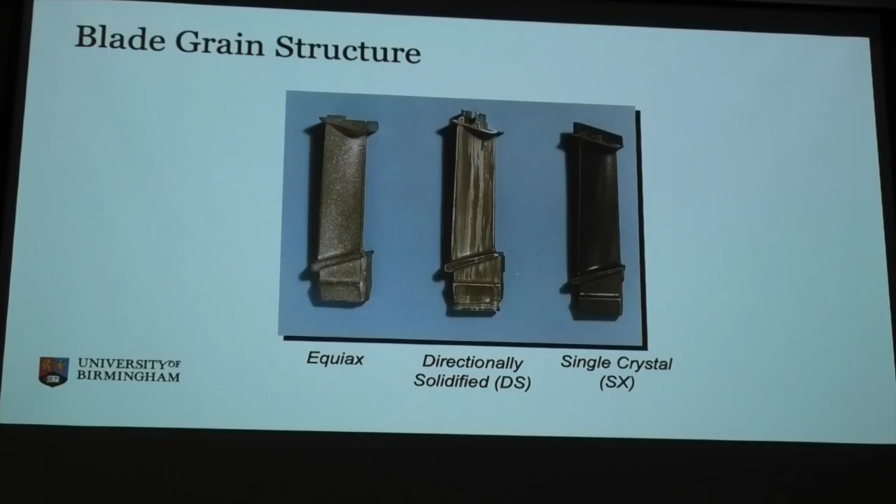So we went for single crystal. We have really taken any kind of opportunity. We had the metallurgist's guidebook to make strong alloys, and we have done the extreme. We've thrown the kitchen sink at them and made it ridiculously hard for ourselves, but we've done it. What that means is we've gone from wrought alloys, standard forgings, equiax cast, just pouring it in a mould and letting it solidify, to directional solidification, and then single crystal casting. Each time giving us a few degrees more of temperature capability that we've squeezed into the engine.

And the rest is down to cooling and coating. So we've made these things really, really complex.

To give you some idea of what that looked like, I talk about creep, and I've talked about it. Rolls Royce ran an engine - that's actually one of the blades from the engine, RJ500. We ran it to see what happened. So we ran half a set in equiax, half a set in single crystal, to see what happened. The equiax one is the longer one - the one with lots of different grains in all orientations actually stretched longer over the duration of the test. The single crystal one kept its shape.

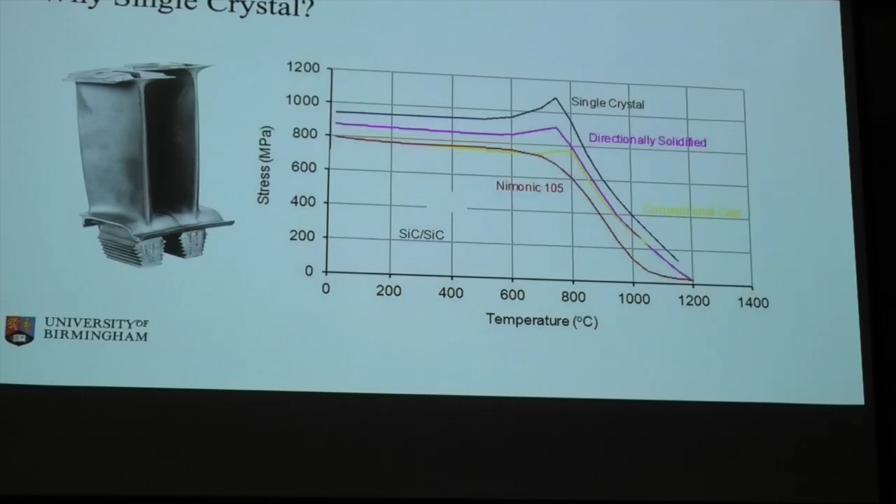I can pass it around. It's just a turbine blade. But you can see how that's improved over the generations of material. We've got more of that ski-jump ramp-up because we've engineered the alloys, and we've got that drop-off, which has given them a much stronger material at higher temperatures. But to do this, we've thrown the kitchen sink at it.

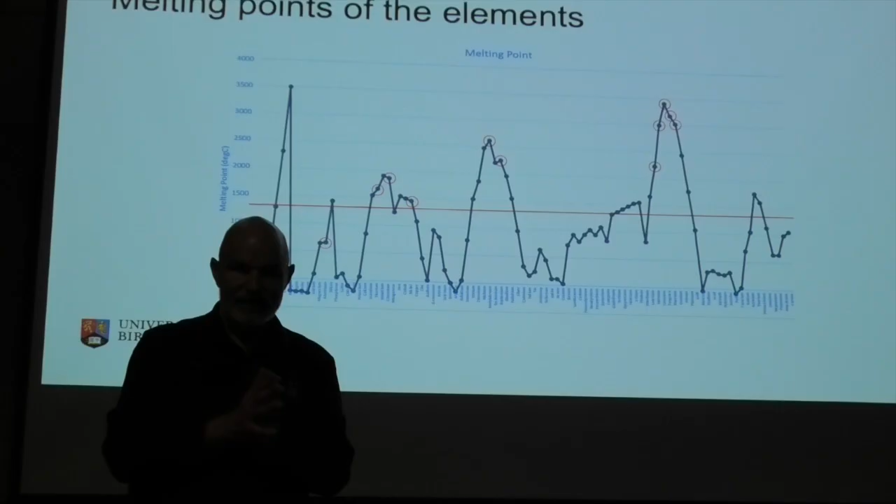And the reason we picked those is, if you say the red line is about your nickel-3 aluminium phase melting point, aluminium's in there because we need that precipitate - we need the aluminium to start getting that coherent precipitate. Everything else we've picked has been some of the highest melting point materials we can get. The only one we're really missing is diamond.

I'm sure if we could, we would, but we haven't worked out how to do that yet. But we will pick all the other elements we've picked from the high melting point range. They're also some of the densest materials you can possibly get as well. So we don't help ourselves, but those are the elements that we chuck into superalloys. So we've gone for high melting point materials, driving up the melting point of the alloy, so we get that temperature capability.

Some of these are really expensive as well. To give you an idea of the composition, a standard single crystal - the ones I've passed around, the coated blades that will pass around - CMSX4, standard single crystal turbine blade for high pressure turbines, shows what's in there in terms of weight percent: 3% rhenium, 6.5 chrome, you can see it on there. Density just under 9 grams per cc.

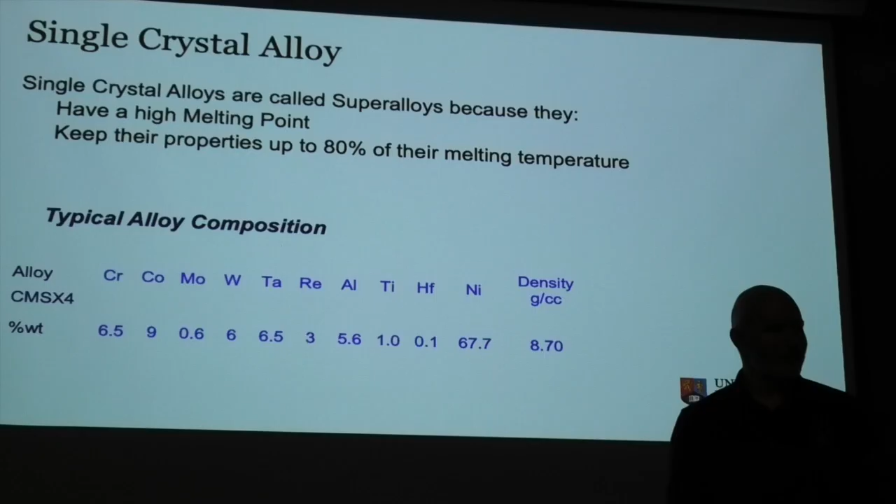So we have thrown just about everything at it. That's mostly because every time we put something in, we find it's not so good long term. So we don't want a load of aluminium, so we replace aluminium with titanium and tantalum. But that gives us issues around castability and other problems. So to compensate for the issues we get, we chuck in something else to compensate. A bit of chrome goes in there for oxidation, because aluminium is really good for oxidation resistance, but we're taking it out, so we slip in a bit of chrome. But that's not good for castability, so let's stick some cobalt in there. Every time we think there's an element that's really good for everything, we're always compensating for its deficiencies by chucking in something else, to the point where we've probably got as far as we can.

You look at those elements though, in terms of weight percent - CMSX4 plotted as a bar chart. Weight percent, mostly nickel. Atomic percent, nickel. The rhenium starts to really stand out between atomic and weight because it's really, really dense. But look at the cost - rhenium is really, really expensive.

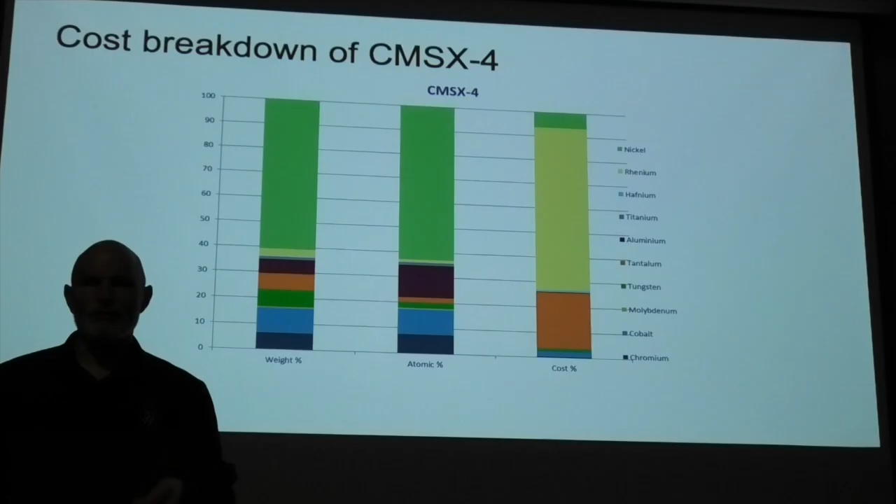3% rhenium is about 70% of the cost of the alloy. This alloy costs about the same price as silver. It always amazes me - if we wanted a gas turbine that looked really nice, we could make it in silver. It would polish up really well, it would look really nice. It would cost about the same, it just wouldn't work. But it would look really nice.

There's another alloy we use that's even better for creep than this one. What we do is double the amount of rhenium - sorry for the colour change - but with rhenium in there, that's more like 80% of the cost. This alloy costs twice the price of silver, because we've chucked in more rhenium, and it's really expensive.

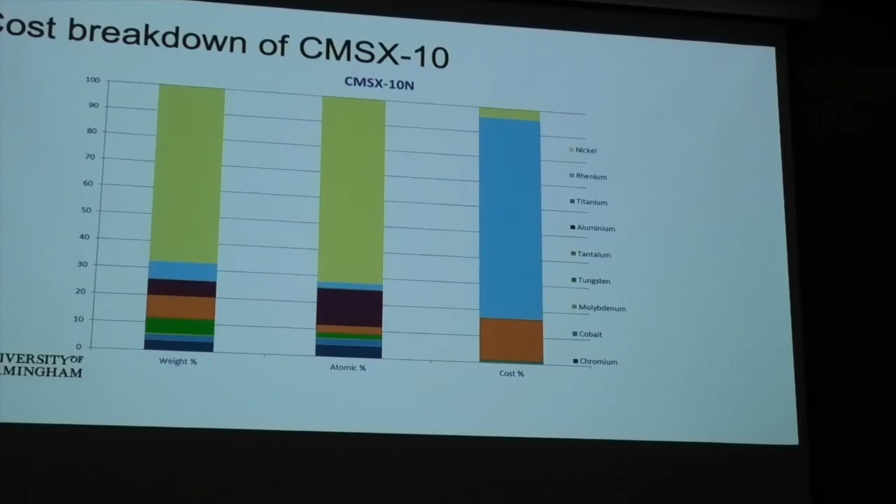As a bit of an anecdote, we tried to reduce the amount of rhenium. It's got a few deleterious effects - it's really good for creep, but isn't great for phase stability. It's not a great material. We decided that the material that would really benefit us was ruthenium. Now, marks out of 10 if you could find that on the periodic table, but we went for ruthenium, and it was really good.

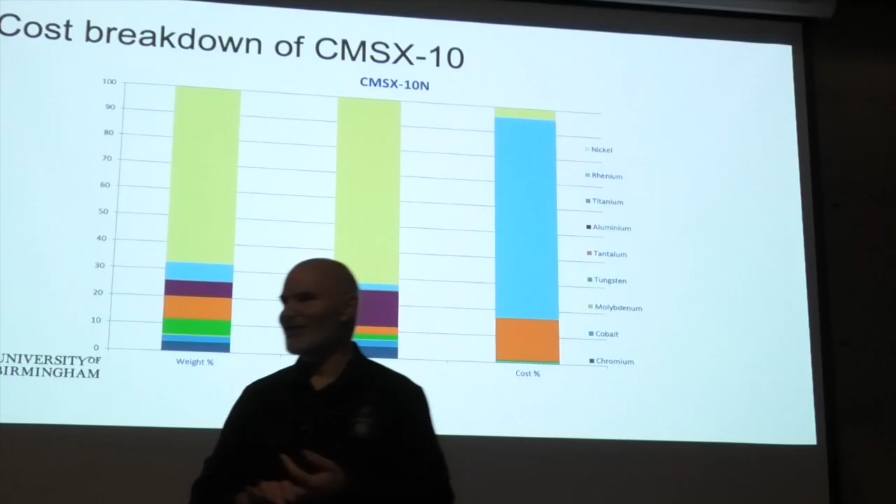The only problem with ruthenium is that there isn't that much of it knocking around. Nobody really mines ruthenium, it's a byproduct of a byproduct. So you find somebody who's mining for some of the other heavy elements, it comes along as part of the mix, you take it out, and you find there's a spoil heap next to a mine that's got some ruthenium in it. The person that held 80% of the world's supply was a Russian oligarch who was sitting on tons of the stuff and didn't know what to do with it. As soon as Rolls Royce, Pratt & Whitney and GE all said we're going to stick it in our alloys, the price rocketed. He doesn't quote it on any metals exchange, he deals out of his back garden.

Which meant that he controlled the price. And the price went up to about, was it $50,000 a kilo? Yeah, ridiculous price. We all went, thank you very much. And then we all said, I'll walk away. And we did, we all walked away. And the price dropped, because he didn't have another market, and he was just going to milk what he got.

Anecdotally, I think he made a mistake. It'd be better selling it at less of a profit, but having a longer market, because once we put it on the engines and got it into service, we aren't going to replace that - he's got 30 years of supply. He hit us straight away during the development engine process, so it gave us the ability to walk away. Interesting marketing philosophy, because we knew what the timescales were, and he didn't - he tried to make his money in the first year.

We've got some really nice photos of it. It looks really pretty. And we're going to do this, and we're going to make it a single crystal, so the whole crystal structure is the same all the way through. All those atoms are kind of the same. So how do we make the blades? How are we going to make these things?

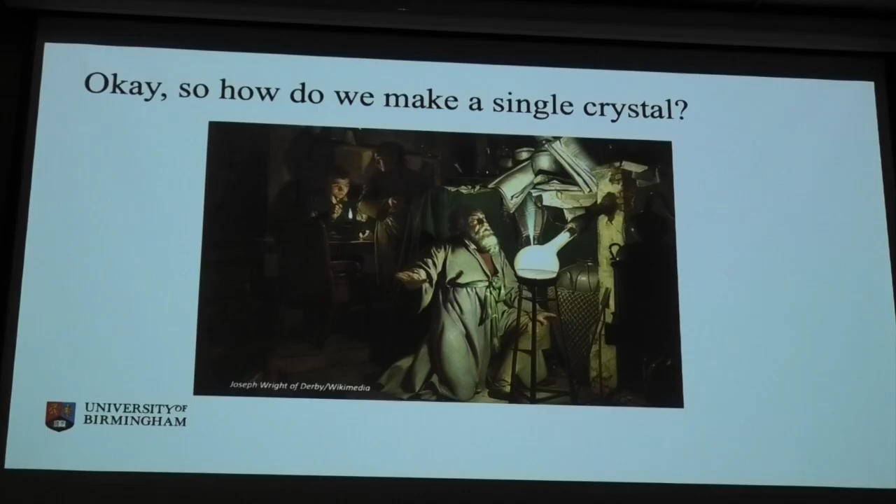Joseph Wright of Derby, sorry, coming from where I am, that's kind of topical. It sometimes feels a bit like that on an industrial scale.

Investment casting. And we're going to trace it back to about 4000 BC. So this isn't exactly the newest thing we've touched on today. We're going to use a process that's been around for six millennia. And we're going to start.

It's a great process, investment casting. I'm sure that was defined by the banking community. It doesn't actually mean that. If you go to about the fourth definition in the dictionary, investment means to clothe or to cloak, just like you can get invested in office, meaning you're clothed or cloaked, given the robes of office. So investment casting is to clothe or cloak a pattern with a ceramic, remove the pattern, and pour the metal in.

And investment casting is where we started. The pattern was basically, typically, beeswax. We don't use beeswax anymore. No bees were harmed in the making of any of the products today.

It's commonly used for jewellery, for dentistry, for artwork, and has been through the years. All of the uses over the centuries have been mostly non-industrial kind of product, but artistic stuff.

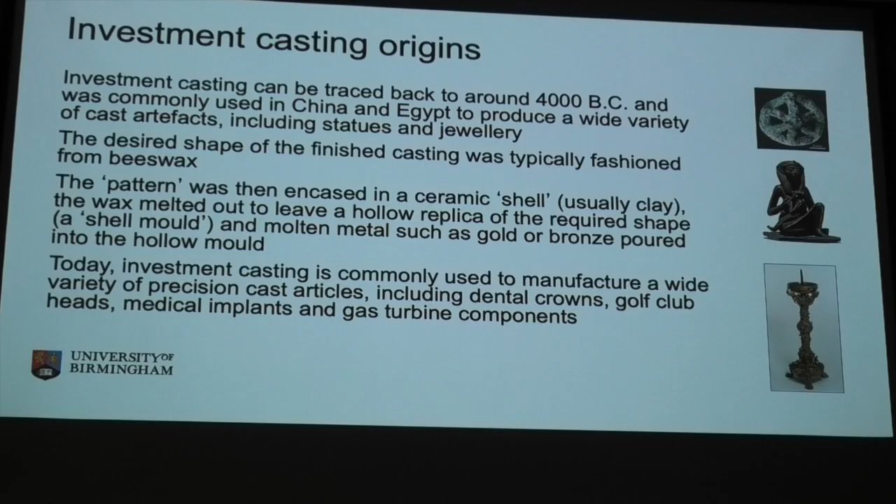Then we get into the modern day stuff. Somebody decided in 1890 to try it for dentistry, so they made wax models of teeth, then cast them up in a little furnace in their own back room, making these little teeth bits. And they kind of worked their way through.

They started to use different materials, making these crowns out of different materials. Really good for gold crowns. Really good process: wax model, stick it in clay, pour it in, pour your gold in, get it out, you've got your gold tooth.

The bit that always kind of confuses me: the Austenal labs were basically working on dental materials. Now, Vitallium, when it came out of there, somebody working in a dental lab decided they needed a really high temperature alloy, for reasons that escape me.

But it turned out that it was really, really good for the supercharger buckets of aircraft during the Second World War. So why you'd need a dental alloy that could take hundreds of degrees, I don't know, but anyway, that's where it came from.

And we actually then looked at this. It came across to Rolls Royce from America. We started making the pieces here during the war. And then we've gone for vacuum casting.

It's been developed out. There used to be a great document, which Rolls Royce has still got, with photos in it of how this process was brought across from America and set up in the shadow labs in Glasgow, Hillington, before it was moved down south later on after the war.

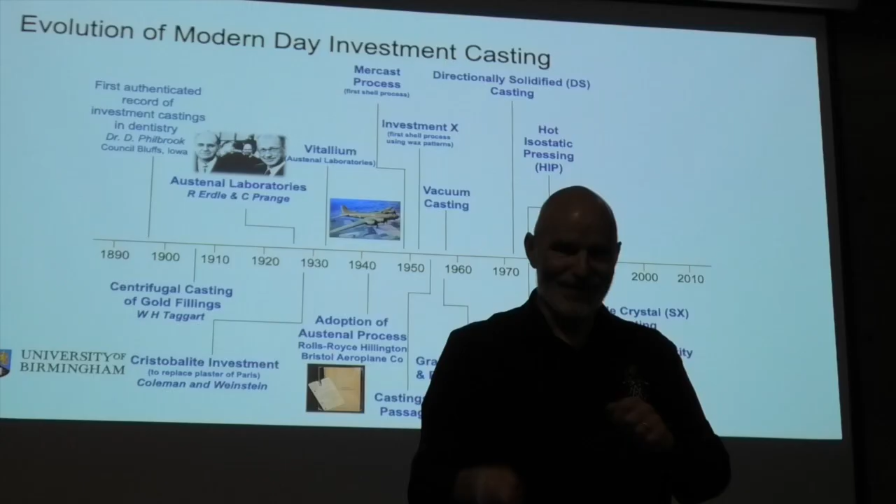So there's all these photos of gentlemen in white lab coats wearing the safety flat caps, pouring metal, which doesn't... it's an interesting document. I wouldn't say health and safety was their primary concern at the time.

But anyway, we've gone all the way through to single crystal casting in the 1980s, and that's where it was developed. So we've pushed it all the way through.

But what we need is to make sure that we can actually get a hole in the middle of these blades. I'm going to pass this round. I'm about 80% certain it'll come back in one piece.

It's ceramic, it's not very strong, so it might break on its own. Don't worry, I have another one.

Basically, we're going to make a ceramic model of the hole we want in the turbine blade. So we want a hole at the end, so we're going to have to make it in ceramic and put it in a mould to make sure the metal doesn't fill the space that's got the ceramic in it, if that makes sense. So that's a solid model of a hole.

So we're going to start with that. It's silica - it's not an ideal material, it's not alumina, which would be really good. It's silica, and we injection mould it into steel dies and make some fairly complex shapes.

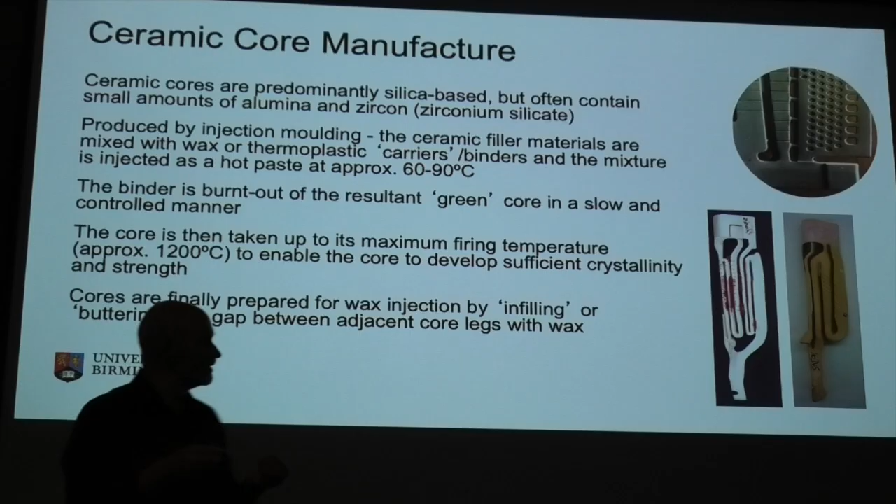The more complex we can make those passages, the more efficiently we use the cooling air. When we pass the air around, we really use it efficiently. We burn out the binder, we end up with the core as you see it there, and that can be taken and passed into the rest of the process. A bit of buttering, a bit of tidying up, and we basically end up with that lovely ceramic piece.

We'll then place that in a wax die, close the die up, inject wax around it. I won't pass this around because I know it won't survive, even afterwards. That's basically a turbine blade wax model thereof. So that's a turbine blade, got the core already inside it. I've lost a bit off the trailing edge already, but that is effectively a wax model of the turbine blade.

So I've now made exactly what I want, a wax with a ceramic core on the inside. Once I've got that, and it's a paste wax, 70 degrees C, we can inject it and make the parts.

We'll inspect them, and we do inspect every blade to make sure that the cores survive, the wax is the right shape, and every part gets inspected.

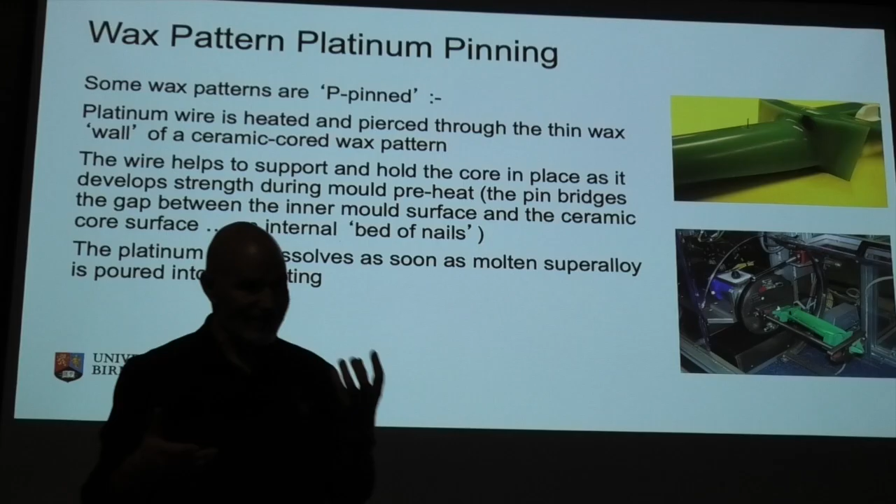The core itself is silica. We need it to be silica, otherwise we'll never be able to remove it chemically afterwards. It has to be a ceramic that we can attack with a chemical. Otherwise, there's no hole.

So we use silica, but silica's got a bit of a problem - it goes through a really weak phase before we cast it. So actually what we really try to do is cast and hold it in place. So you walk into an investment foundry, and despite the cost of all the alloys, the only thing we keep in a safe are the pins that we use to hold this core in place while it's going through its weak stage, which are made of platinum.

We keep the reels, cost about £250,000 each. Each one lives in a safe. Interestingly, when we last did a re-layout of the precision foundry in Derby, we had to move the platinum pinning machines, which look like here. We were going to move it on a weekend.

We moved on a Saturday. Do you know how many volunteers we got to sweep up the floor and tidy up where the machine used to be? I think everybody in the wax room wanted to volunteer to help move the machines, because you could sweep up a few grams worth of platinum that had fallen on the floor.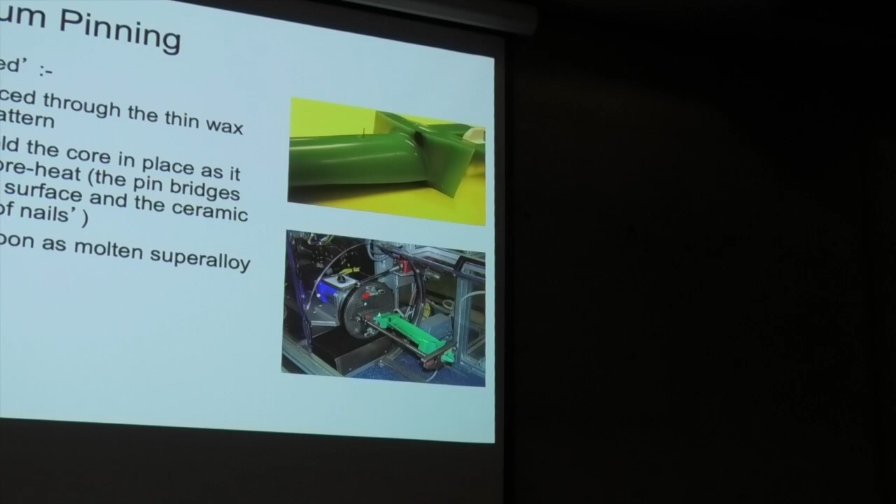But we basically use platinum not because it's got any particular properties, apart from the fact when superalloy hits it, it dissolves - it's like boiling water on sugar, it just dissolves. So platinum dissolves into the superalloy, and you end up with a witness afterwards that's superalloy, but it doesn't leave a concentration of platinum, which would be weaker. It just dissolves into the material.

And the alloys are actually certified to have a small trace element amount of platinum in them, because we know we're going to dissolve it in. So it dissolves, disappears, that's fine.

Then we're going to stick these parts together, and there's Belinda there assembling up a nozzle guide vane. There's some turbine blades on the top one, and we're going to make that wax assembly. We use different coloured waxes because they've got different melting points. The red one happens to melt at a slightly lower temperature, which allows it to flow out before the green one, and allows us to control the flow of getting this outside of the shell.

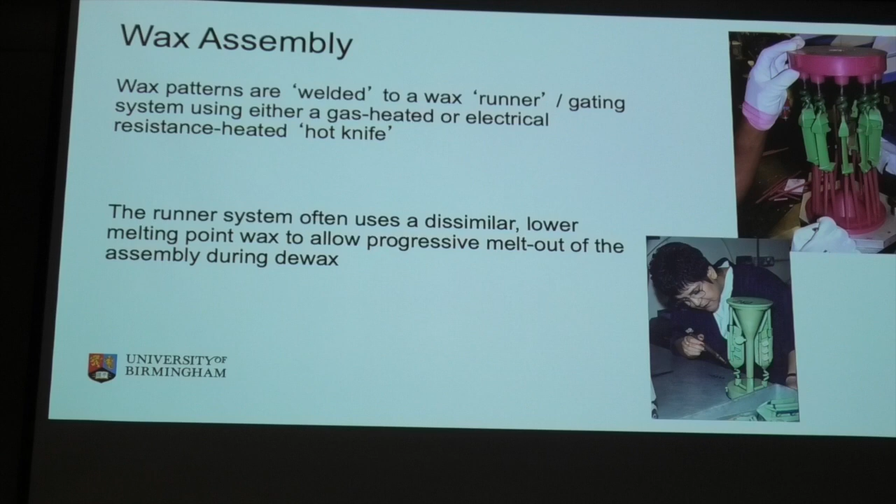Really useful, because we're going to coat this up in a minute. Let's show the photos of coating up. We're going to dip it in a kind of wet slurry, which is a silica sol, kind of liquid - I don't know what it really looks like, a very runny kind of bread mix. It's kind of very sloppy. And you dip it in there and you pull it out and you let it drain.

Then you're going to stick it into the sanders, which you can see at the back of the lower photo. And they just drop bits of ceramic on, very fine bits of ceramic, 0.2 millimetre, 0.5 millimetre, those kind of sizes. And because it's wet, it's like running up a beach out of the sea.

You run up a beach with your feet wet, you get covered in sand. We use exactly the same principle here.

We take it wet, stick it into the sander, rotate it round, and the sand sticks to the wet surface. Then we stick it on a dryer, send it away for a couple of hours, control the temperature, control the humidity, dry it out, come back and do it all over again. We do this depending on the size of the component. A little helicopter blade like this, we probably do that 5 or 6 times. Larger blades, industrial gas turbine, could be 20 times. A normal turbine blade is going to be somewhere in the region of 8 times, top.

The primary coat, the first one, the one the metal sees, is the best quality - thickest slurry, finest sand, that's the one that gives you the surface finish. After that, slightly more runny slurry, thicker sand, we're just trying to build up bulk and strength.

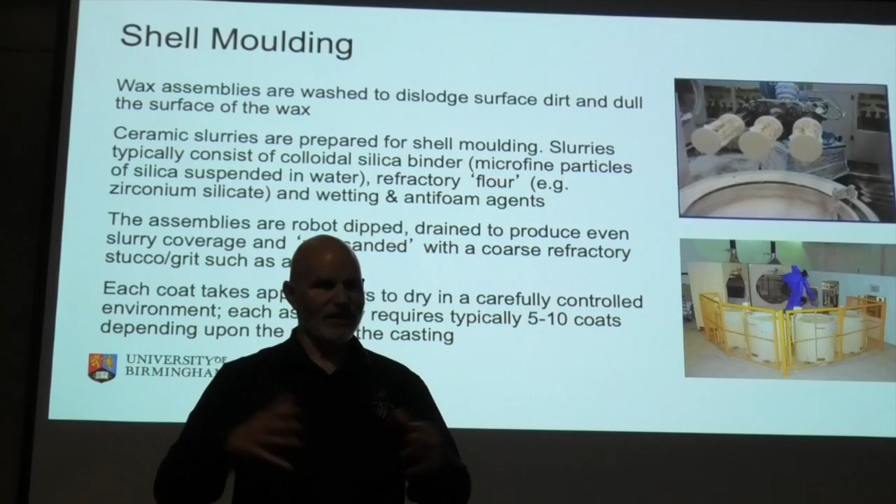But then we want to get the wax out. So we dry it for 24 hours - it's still not particularly strong - and we stick it in a machine that looks like the one at the top there. We could use a furnace, but we can't heat it up slowly to melt the wax out. Although it melts at 70 degrees C, if we heated it up slowly, the wax would expand. The shell isn't very strong, it would expand and blow apart, and we'd end up with crumbs in the bottom of the furnace. We've tried it.

Yeah, that wasn't one of the more successful ideas.

So what we do is stick it in this kind of vessel, close the door quickly, press the button, and in 4.5 seconds we hit it with 4.5 bar of 180 degrees C superheated steam - high pressure, high temperature. The wax suddenly finds that it's got a great property: it doesn't conduct heat very well. So it actually melts the surface of the wax before it gets into the bulk and causes it to expand. It flows off from the surface, all the way down on the inside of the shell, flows away, and we don't blow the shell up. Neat trick, if you can get away with it - it has to be, we hit it very hard, very quickly.

Once you've got the wax out, it's biscuit fired at 800 degrees C - a technique from the ceramics industry - which gives us enough strength to handle it. We end up with, on a small furnace, a shell that looks like this. I won't pass this round because it's fragile, but you can come and handle it later. It's ceramic, hollow - we've burnt the wax out, given it a bisque fire, and we've got the cores inside there. That's now ready for casting.

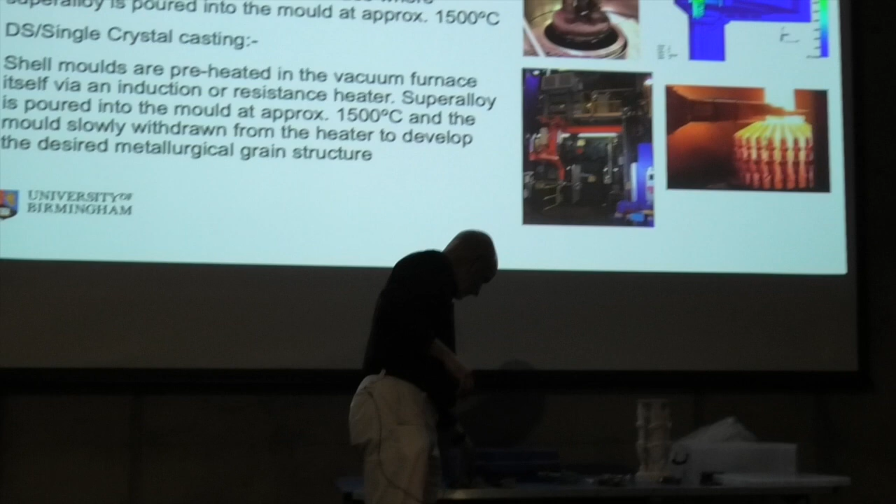We can do equiax casting, which is the polycrystalline one, so we could end up with blades that look like this. This is another etched up polycrystalline one - I'll pass that round. This is actually an old polycrystalline blade, Concorde HP1 blade - a high pressure turbo blade from Concorde, equiax. So that's that kind of technology.

But we could just pour the metal in, let it solidify, and we get that. To give ourselves this single crystal directional solidifier, we want to control how those grains grow, so we're not going to just pour the metal in and let it flow and stop. What we do is withdraw it slowly from the hot part of the furnace to the cold part of the furnace, encouraging those crystals to grow from the base. There you go, that's what the furnace looks like.

That mould sits on a copper cooled chill. What we do is take the metal, melt it in the top chamber, pour it into the shell, and leave it in the shell - it's still molten. The top chamber of the furnace, well the middle chamber, is at about 1500 degrees C, give or take.

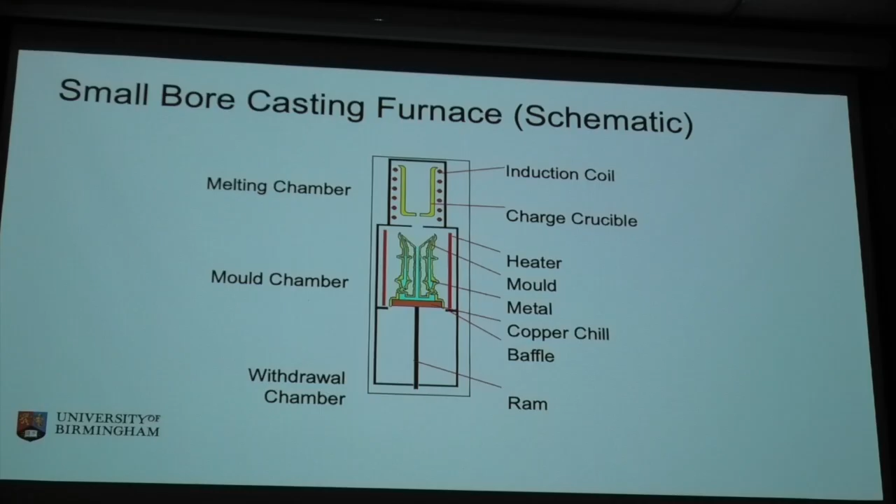We're going to take those grains. That's what it looks like, we're just going to grow that. That's it, that's the cartoon. That's what it looks like when you start to do a little bit more of an engineering drawing. It's a bit more controlled than it is, and we start to get these crystals to develop.

Now, this is what happens. We get this, and we're going to withdraw from the top chamber into the bottom chamber. Not quite that quickly, it takes a couple of hours, but we're going to move it slowly from the top to the bottom, and we're going to get it to drop in temperature as we do it. What that means is, as we start, at the very bottom, we've got the chill layer sitting on there. Imagine the component above that, we just happen to have cut it off. So in there you've got the metal. That top bit is going to be liquid, that's solid.

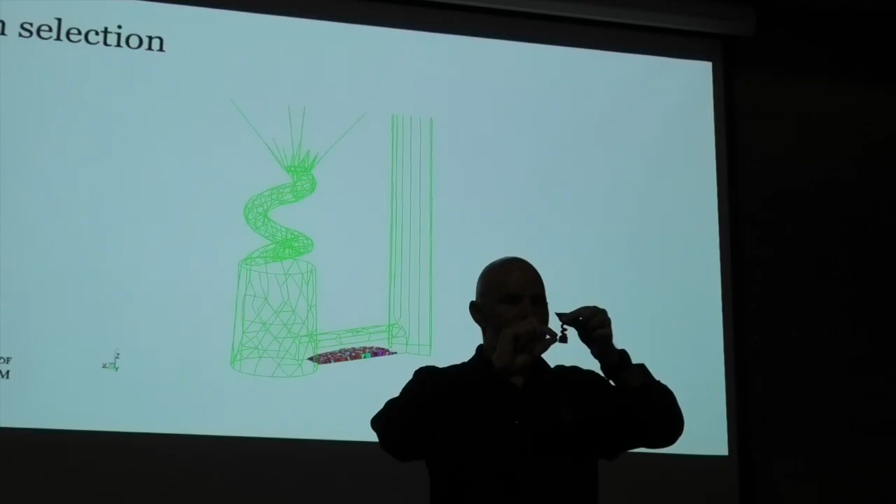As we withdraw it, these crystals start to grow. Then they hit this kind of selector, this kind of twisty pigtail. Now, it just so happens that the orientation of the crystal that we want, vertical, is the one that grows the fastest. We lucked out there. So we're going to grow these crystals really quickly, like 9 inches an hour, so not very quick at all. But the crystal orientation that grows the quickest grows up, grows sideways, and kills off all of the other orientations. So by the time you get about 5 millimetres into growth, the only crystal orientation you've got has got the vertical orientation that we want. We just don't know, we've got lots of them, we just don't control the rotation, we don't need to in most cases. There are ways of doing it.

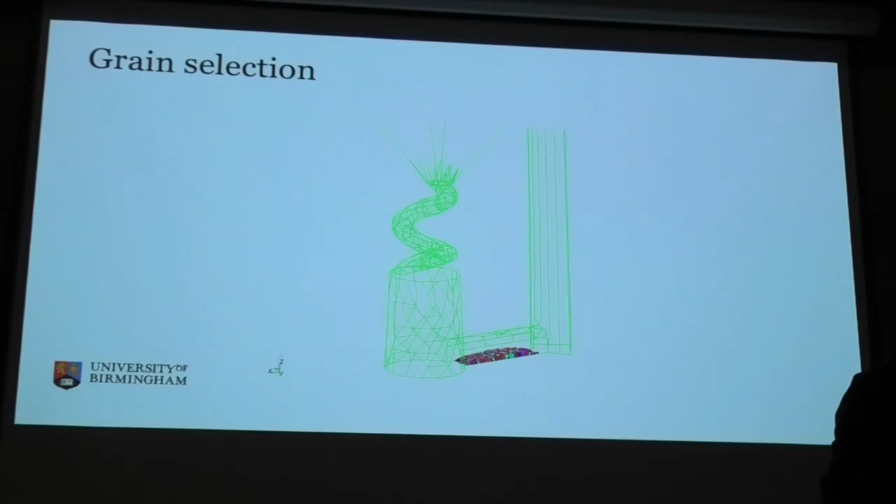Then we get to the pigtail, and that selects out one of those grains. And it's just a mechanical selector. Because as a load of grains go in at the bottom, through the choke at the bottom, then one of them grows up and stops its mates growing into the kind of angled tube. So you get this angled tube and they all grow past it, and one of them just grows past the edge, and the others can't go past it, so one of them goes up and grows sideways, and actually goes round. And in 3D, a pigtail is a mechanical selector for single crystal.

A couple of edge parts if you can squint at them. Send that one that way.

And then we'll run the video. Just be careful, there's a couple of burrs on one of them.

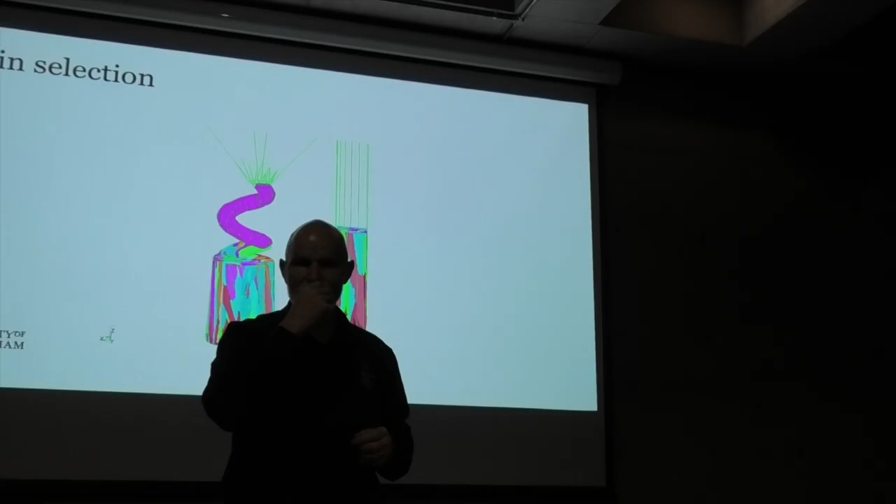Right, so we're going to grow like that. All the crystals are now the same orientation, just lots of them. Then we're going to hit the single crystal selector and pop. One grain makes it through, blocks off all its mates, gets to the top. Single crystal pops out. We then take it through that kind of delta that spreads it out, and we grow that carefully through the whole component. So we've selected one grain, and we've encouraged it to grow all the way through to the top. Now, as I say, a couple of hours to do that, 3.5, depending on the blade size.

So we get this option. We've got this optionality of how we do it. We can either do equiax.

That kind of didn't show very well. But we can do directional solidification, or we can do single crystal, and we can grow all of these components and actually make a lot of different things. You know, all of the blades are made by the same process.

Once we've got them, the shell's looking a bit sorry by this time. It's done 2 or 3 hours and it's kind of past its sell-by date. So we're going to knock the shell off, chemically remove the core, and end up with the component. So we end up with something that looks a bit blocky, but you can kind of see, we can take the core out and we end up with those kind of passages on the inside.

So we've gone all the way through that process and we've ended up with a component that's a single crystal. This is all single crystals.

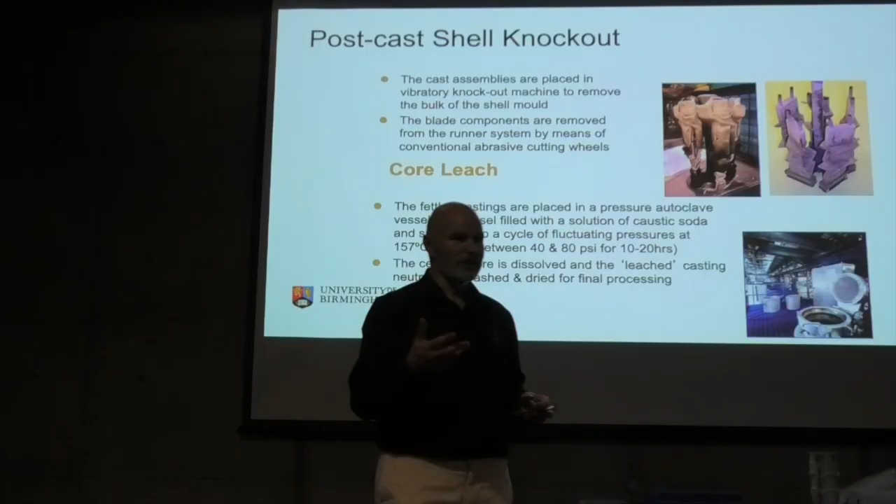So it doesn't really matter whether we're making something this big, that's an IP turbine blade in that really expensive alloy, or an industrial gas turbine, a helicopter blade, or a simple turbine blade. We can go through the scales, exactly the same process. To the point where Bristol used to be known as the military facility, Derby was known as the civil facility in Rolls Royce, but the foundries actually didn't focus on that.

They actually focused on variations on the process. Bristol used to be equiax, it's now very, very large single crystal parts. Derby, smaller single crystal parts, Rotherham, same size as Derby. And actually, it doesn't matter where it is, what we're making, whether it's military parts or civil parts, they all go through the same foundry. Because actually, it's not what the part does, what the engine does, it's actually the process that we use. It makes no difference.

So we've got that. I mean, that's bizjet sized. So there's all sorts of different sizes that we knock around with. So we end up with that. We're going to core leach, take the core out. Then we're going to emery dress it, inspect it, heat treat it.

And every part goes through every inspection hole. It has to be stamped off. Because if we get a failure in service, we have to make sure that we can go back through the records and determine who did what to which part when. And we've done this - you get a failure, we'll go back and say, well, you stamped that part off, do you remember anything about it? And we'll chase it round.

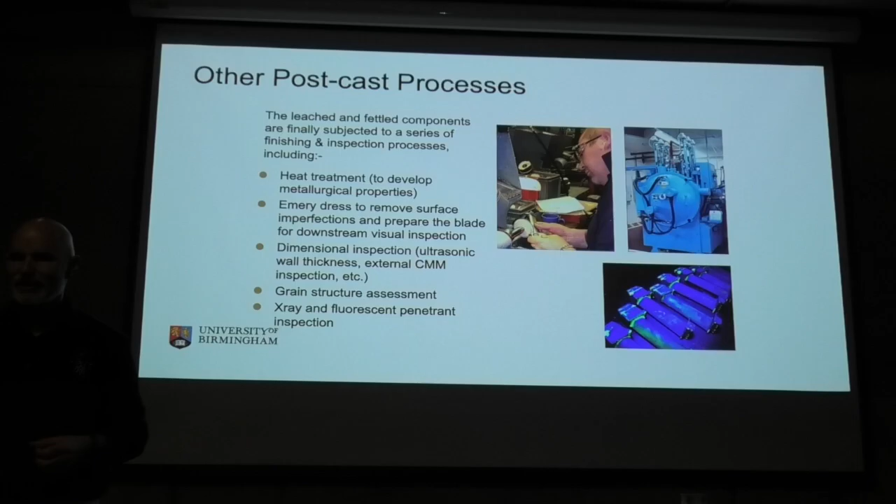And it's all on paper still, by the way. Because we've tried to move away from paper, but can anybody think of any other medium that survived the last few thousand years? We all thought that CDs were good. There are some exceptions for some bits, but the only bit that we've got away with is X-ray.

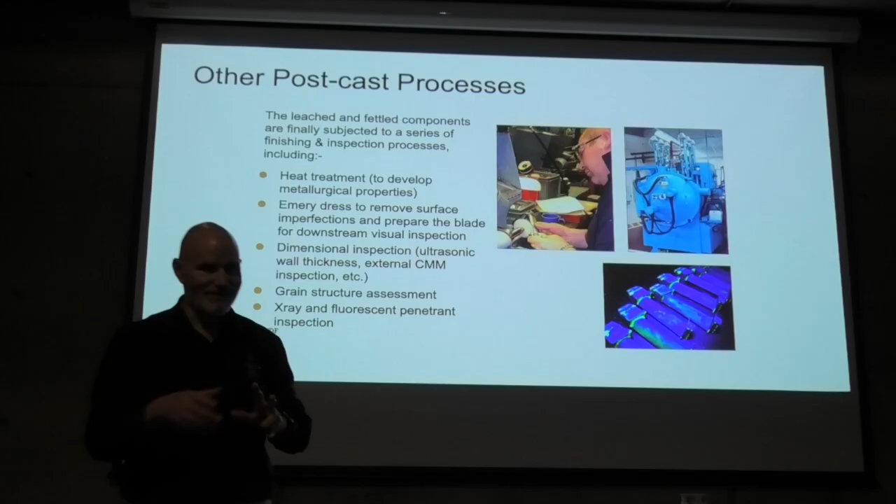When we actually X-ray every part, we are now allowed to do digital X-ray, because the old silver plate X-rays, if you keep them for enough years, they become a fire hazard. And there were a couple of foundries globally that burnt down because their X-ray store went up first. So actually, we've been allowed to save digital X-rays - the FAA have allowed it - but only if we write the file to 2 servers and save both servers in a secure store when we've done. So actually, they're really fussy about how we keep records.

So anyway, we've been through the process. We start with the core, we try and make that whole. We then wax - when it was wax - we assemble it, we shell it, de-wax it, pre-fire it, prep the cast, we cast it, take it out, inspect it, send it off for machining. And then when we've done all of that and we've machined it, we'll then go and stick a coating on it.

Thermal barrier coating - it's oxygen transparent, so it doesn't protect from oxygen very much, but it's partially stabilised zirconia that we grow on the surface, and that's 200 microns thick, and will reduce the temperature by 200 degrees C. There's a whole technology lecture in what we do in the coatings, but we'll coat every single crystal blade like that.

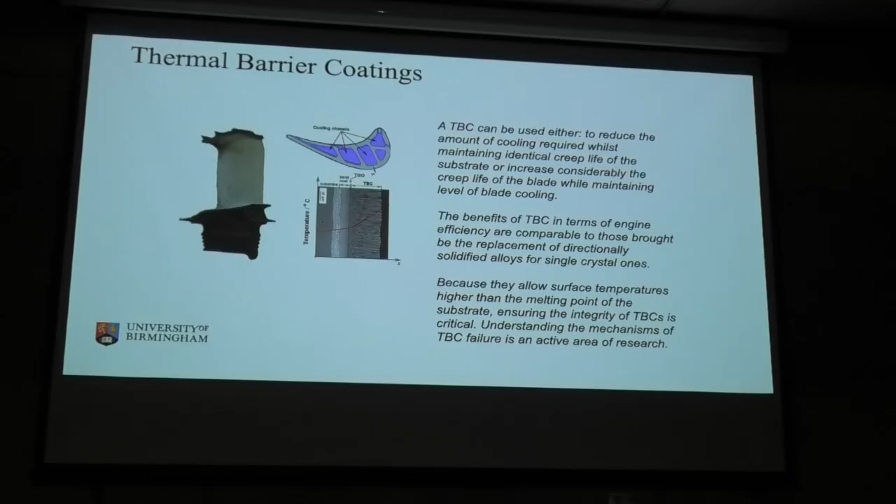And so we end up with these components where we've got lots of things going on to make sure that at the end of the day, everything survives. And, you know, understanding why these things fail - often we'll lose the thermal barrier coat and we'll burn through the blade, and that's why things get taken off wing after 10 million flying miles. It tends to be things like that, the loss of the barrier coats, that actually mean that we're going to replace after however many, 5,000 flights.

Turbine blades go through exactly what these blades have to go through: 300 degrees C above their melting point, 27 tons of load, a load of heat, and 900 horsepower they have to remove to keep the engine running. Those are the requirements, and this is how we meet them - investment cast, single crystal casting with coating on a cool turbine component.

And that was a whistle-stop tour through turbine components. I'm sorry for the technology in the middle. Any questions? From a non-engineer.

Given that you've got a crystalline alloy, can you recycle any of this? If you take components off, can you reuse your alloy? Yes, this is where it gets really good.

For years, when we do a casting, all of this stuff we don't use - all the bits I've handed around, the pigtails and stuff, we don't use. We segregate those alloys, we remelt them, well, they go back to the alloy supplier. The business case is such that we segregate them, send them back, they're cleaned up, and they go around the loop. We've been doing that for 2-3 decades. We ship back to the alloy supplier free, because that comes off the cost of the next batch that comes back in. Because if you charge them to take your scrap away, they charge you more for the privilege anyway. So we've worked out the economics of it, and it does come round.